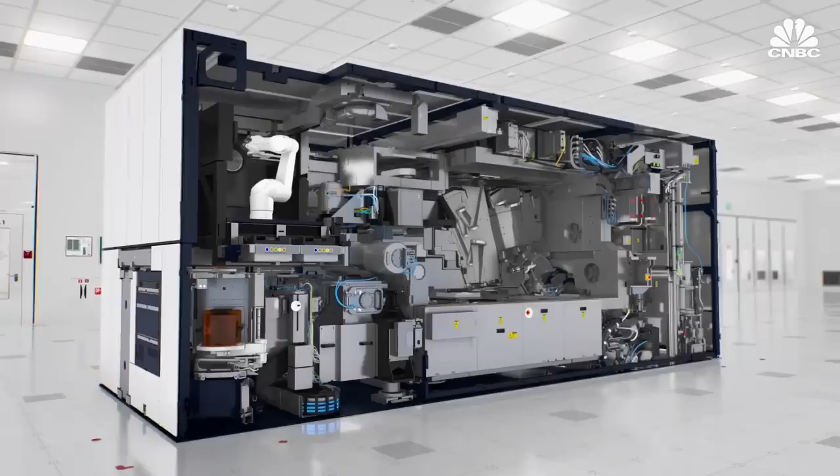ASML has a monopoly on the fabrication of EUV lithography machines, the most advanced type of lithography equipment needed to make every single advanced processor chip that we use today. This company is one of the most extraordinary organizations in the world. We are the only provider on the planet of this critical technology, the most advanced technology manufactured in the United States. This vision started 50 years ago with bringing the digital world onto a chip, and that pace of technology innovation is unstoppable.

At the center of this big factory in the Netherlands, in the midst of a months-long assembly process, there's a revolutionary machine that the whole world has come to rely on. You could see an EUV machine right behind me. The size of a city bus, but working with atomic-level precision, these EUV lithography machines are the most expensive step in making every advanced microchip that powers the modern digital age.

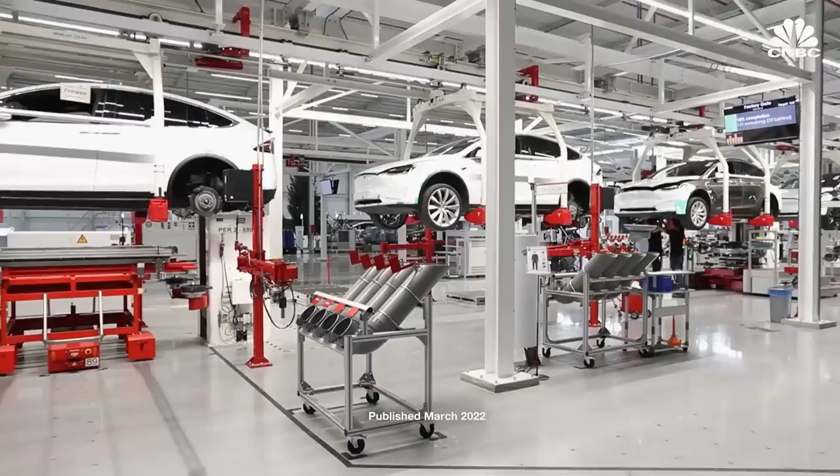Data centers, cars, and every single iPhone rely on this. We are the only provider on the planet of this critical technology. These machines are the only way to print minuscule designs on these chips. They cost up to $200 million, and they're only made by a single company, Advanced Semiconductor Materials Lithography, or ASML.

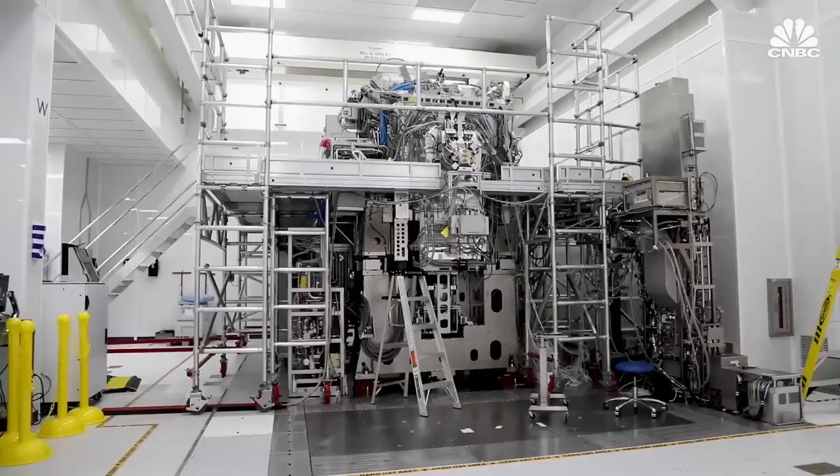Today, ASML has a monopoly on the fabrication of EUV lithography machines, the most advanced type of lithography equipment that's needed to make every single advanced processor chip that we use today. This company is one of the most extraordinary organizations in the world. The machines that they produce, each one of them is among the most complicated devices ever made.

In the midst of a chip shortage that's caused back orders of everything from PS5s to Teslas, the need for ASML has never been higher. Its stock has skyrocketed since 2018, while its three main customers, chip makers TSMC, Intel, and Samsung, vie to be front of line for ASML's next breakthrough technology.

The price tag for this next machine, which promises to push the boundaries of known physics, is more than $300 million. It's so expensive that most companies cannot afford it. While the chip wars rage on, we wanted to find out what's really going on inside the quiet company making the machines that print them all.

This is the optical part of the machine that makes EUV possible. We got a rare tour inside ASML's clean rooms in California and the Netherlands to see how these machines use precision lasers, exploding molten tin, and the smoothest surface in the world to bring our digital age to life.

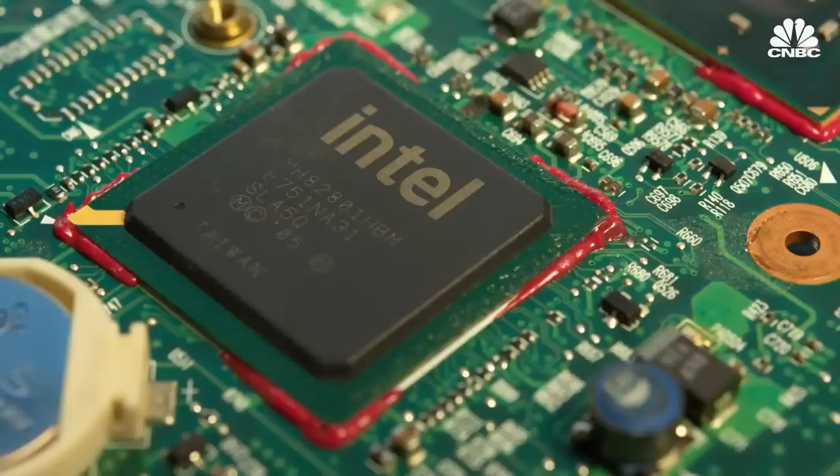ASML's crucial role on the chip-making stage has brought it wild success over the past few years, making it even more valuable today than Intel, one of the biggest chip makers it supplies. It's double-digit growth every year, and we're not a startup. We have now 32,000 people.

Peter Wennink has been CEO since 2013, but he joined ASML back in 1999, just 15 years after its humble beginnings. It started as a subsidiary of Dutch electronics giant Philips in 1984, conducting research out of a leaky shed next to a Philips office building in Eindhoven in the Netherlands.

They were in financial dire straits, so we had no money. We were poor. And because the problems Philips had were so big, nobody looked at this little outfit out there that was trying to do something crazy, so they neglected us.

Still, in its first year, the company successfully launched a first-of-its-kind machine that used precise rays of light to print tiny designs on silicon to make microchips, a technology known as lithography. The first lithography tool really looked like a projector. There is basically a reticle which holds the image that you want to project, then there is an optical system which is going to take this image and project it on the wafer.

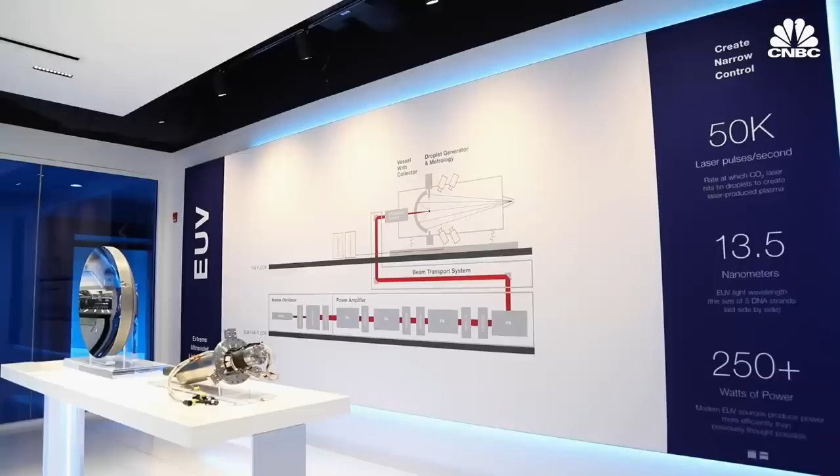Semiconductor lithography was invented in a US military lab, and for a long time, up through the 1980s, the key lithography firms were American, based in New England. Chris Miller of Tufts University is writing a book called The Chip War, about the fight for the world's most critical technology. When the industry was getting ready to jump into the early stages of EUV research, none of the US firms were ready to take the plunge on what would be an expensive and risky proposition, whereas ASML was.

By 1988, ASML had 5 US offices with 84 employees, and a new Dutch office that eventually became its headquarters in Veldhoven, where CNBC took a tour earlier this month.

We're walking through the EUV factory, which is about 50,000 square meters of space with 1,500 employees working in shifts 7 by 24 to produce 100% of the EUV machines shipped worldwide from this facility.

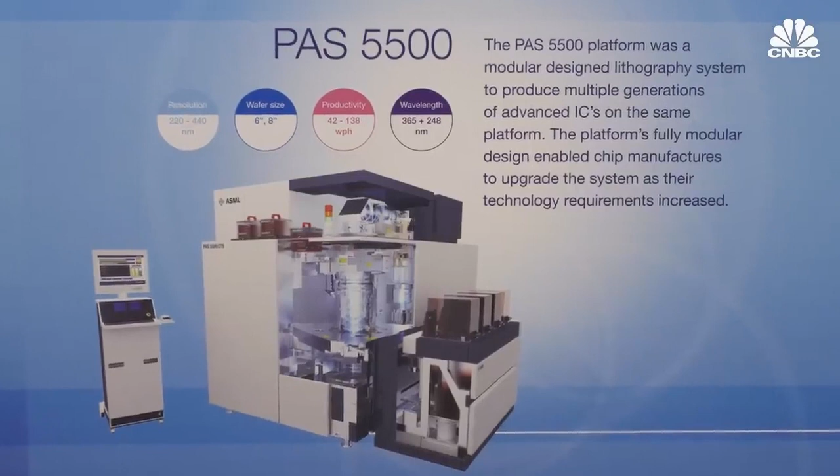With a breakthrough machine, ASML started turning a profit and went public on the Amsterdam and New York Stock Exchange in 1995. By the 2000s, ASML was acquiring California tech companies like Silicon Valley Group and various key suppliers like Cymer in San Diego, where we also got an inside look at the cleanroom where ASML's light source is produced.

So this is actually the nozzle manufacturing area where we build the nozzles. This is the piece where the tin shoots out of. That's what's going to create your EUV.

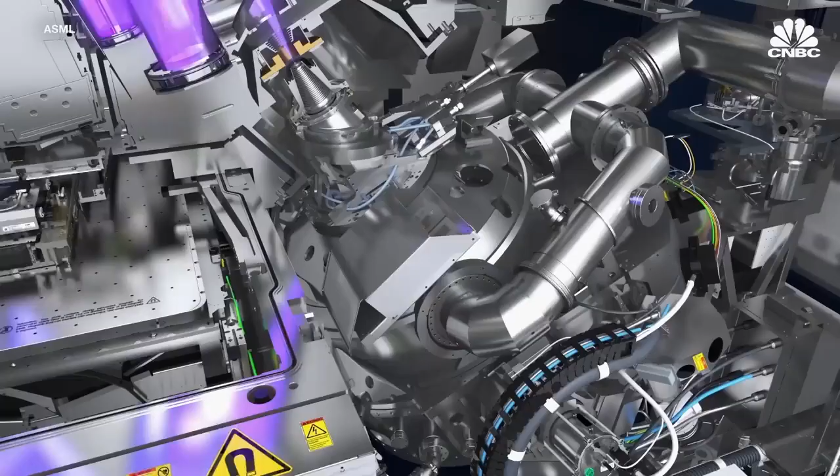EUV refers to extreme ultraviolet, an incredibly short wavelength of light that ASML uses to print smaller, more complex chips. But developing this revolutionary technology was incredibly expensive.

We didn't have the money, so we went out and found partners, which was the basis of the way that we built the company. So we were forced to be a system architect and a system integrator.

In 2012, ASML offered about a quarter of its shares to its biggest three customers: Intel, Samsung, and Taiwan Semiconductor Manufacturing Co., or TSMC. They had to accelerate the R&D for EUV, and the only way they could do this is to get their largest customers involved. And one way you can make your commitment real is to make them a shareholder.

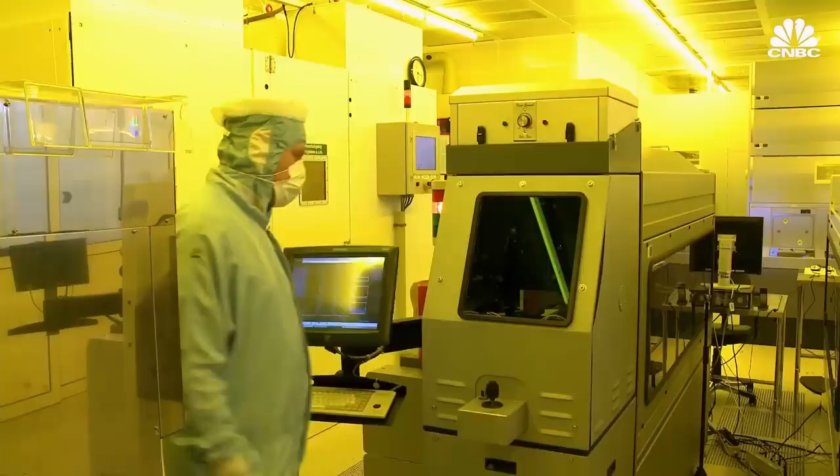ASML is a Dutch company, but it's also a Dutch company that relies very heavily on US components, in particular for its machines, and at this point relies also very heavily on one Taiwanese customer for its sales.

TSMC made up nearly 40% of ASML's sales last year. In 2019, the Taiwanese chipmaker was the first to deliver high-volume chips made with EUV, a milestone that's kept it at the head of the pack ever since, its chip technology at least one node ahead of Samsung and Intel.

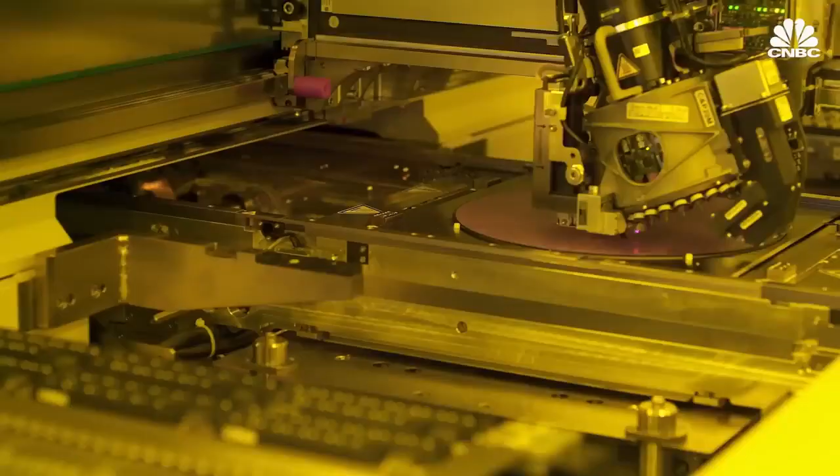And it has been TSMC's customers that have gained a lot of benefit, like AMD, NVIDIA, and others. And yeah, you can argue that this has come at the expense of Intel not executing. Intel is just now producing its first chips with EUV this year, 3 years behind TSMC.

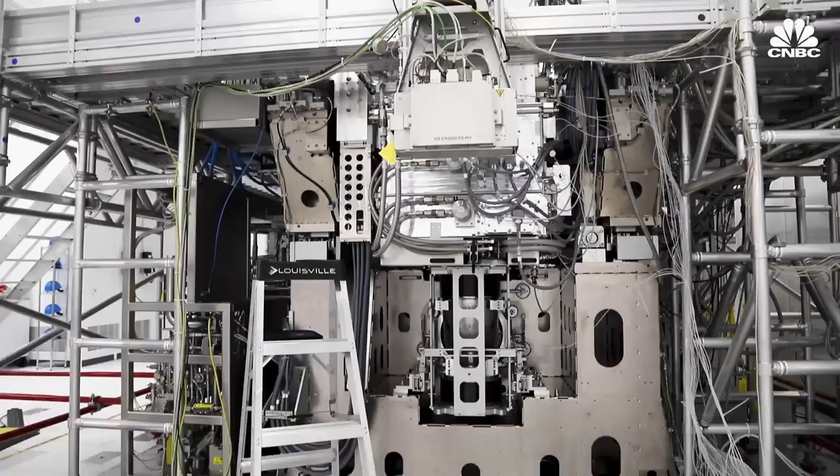But it's made a bold move in hopes of catching up, an early investment to secure the first prototype of ASML's next machine, high numerical aperture.

To understand why the success of a giant like Intel hinges on ASML, let's take a look at how EUV lithography revolutionized chipmaking. When you start breaking down what it takes to make an EUV lithography machine, it's sort of Nobel Prize winning in terms of the engineering involved.

Chips are made from silicon, an abundant element found in rocks and sand that's purified, melted down, then sliced into circular wafers, the surface on which chips are built in a grid formation. Each wafer can have dozens of thin layers, making up billions of transistors that determine what the chips can do.

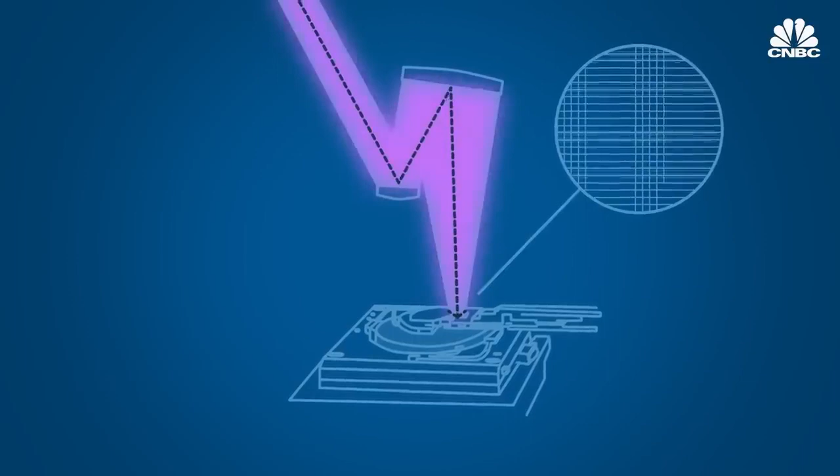These layers are printed using lithography. Extremely precise rays of light are projected through a mask of the chip design. When the light hits the surface of the wafers, which have been coated with photoresist chemicals, it prints the minuscule designs on each layer at extremely high volumes.

If you think of a typical processor chip in an iPhone, for example, it will have over 10 billion transistors on a chip, and Apple will sell 100 million or more iPhones for each model that's rolled out. So you're already talking in numbers that are far bigger than you or I remember how to pronounce.

As the wavelength of the light source in making chips gets narrower and narrower, it gives us the ability to make chips with smaller features, which means the chip is faster, the chip can be smaller, the power consumption of the chip can be lower. The smallest transistors are more than 10,000 times thinner than a human hair.

The designs have gotten so small, ASML had to develop new methods of printing at the very edge of known physics. With the help of customer investments and a consortium of scientists, ASML figured out a way to create large amounts of extreme ultraviolet light, with a wavelength so short it's not only invisible to the human eye, it's absorbed by all natural substances, even air.

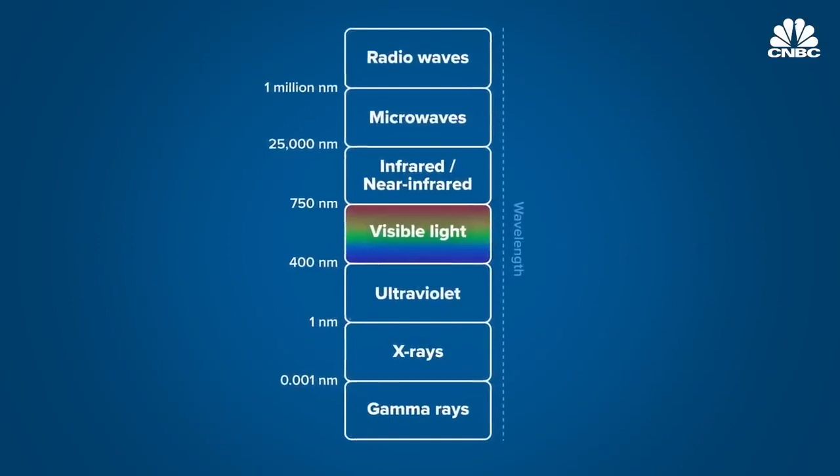So the entire process has to happen in a vacuum, a first for lithography. At 13.5 nanometers, ASML's EUV wavelength is the size of just 5 DNA strands laid side by side.

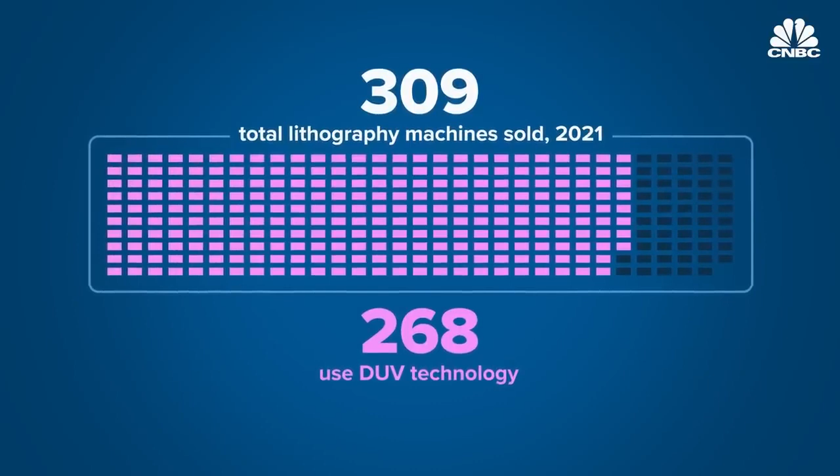The previous generation machines used deep ultraviolet light, or DUV, with a wavelength of 193 nanometers. The vast majority of ASML's business, 268 of the 309 machines sold in 2021, still use DUV technology, which is used to print the less advanced chips, which are in shortest supply.

DUV is for anything that is low technology, like a toaster or a refrigerator, or even some of the electronics in your car. Today's iPhone 13 is EUV.

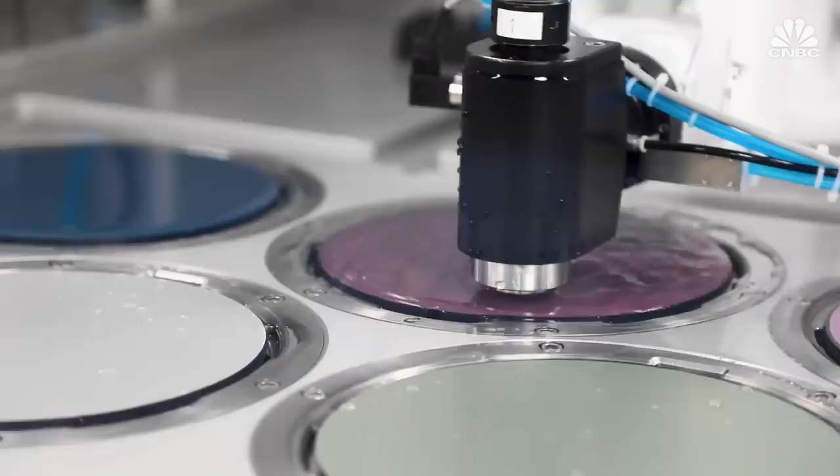Both DUV and EUV lithography is so advanced it requires precision down to the atom. This is an EUV cabin of our clean room, which is 10,000 times cleaner than the outside air. We're wearing these clothing not to protect ourselves from the environment, but to protect the machine from the contamination that's created by us.

This tiny thread may look like the strand of a spider web, but it's actually molten tin being shot out at a pressure of 4,000 psi, and it's how the EUV light is created. This is continuous tin—it never, ever stops. The tin is streaming through a perfectly calibrated nozzle, which we saw being built in San Diego, at a rate of 50,000 droplets per second.

A 30 kilowatt carbon dioxide laser hits each droplet twice, vaporizing them into plasma. These tiny explosions are what emit photons of EUV light. A huge number of tin explosions need to happen because only about 5% of the photons reach the actual wafer.

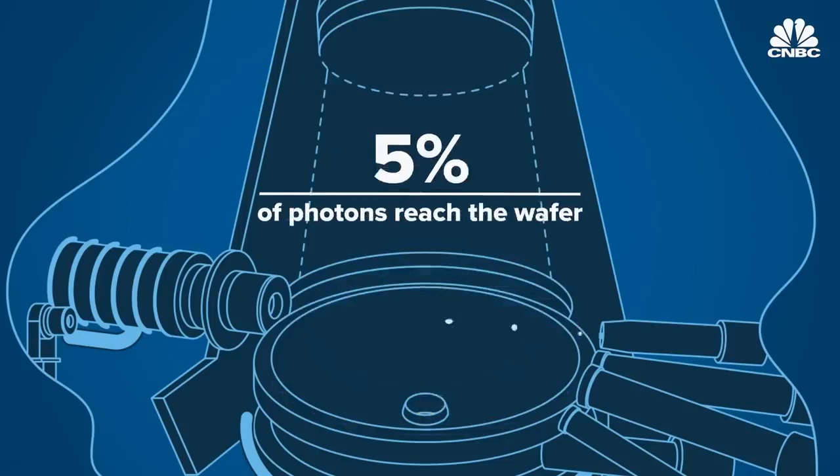The light particles are so short they get absorbed by glass, the typical method used to precisely aim light through a lens. So ASML partnered with German optics company Zeiss, which makes the flattest surface in the world. The flatness is really just incredible. If you took a mirror element that is maybe this big and blew it up to the size of the country that we're in, the biggest bump would only be about 1 millimeter across the entire surface of a mirror the size of this country.

EUV light bounces off these groundbreaking Zeiss mirrors until it hits photoresist chemicals on the surface of the silicon wafer to print minuscule designs that make up the chips. The aim needs to be so precise, TSMC says it's equivalent to shining a laser from the moon to hit a coin on the Earth.

So your tin is inside a reservoir here, and then you're firing out this way. Pete Mayall has been running this clean room for 6 years. If any kind of defect particle whatsoever is even on the tip of that capillary, it's a fail—we'll remove it and start all over again. And the speed and scale at which this has to happen is staggering.

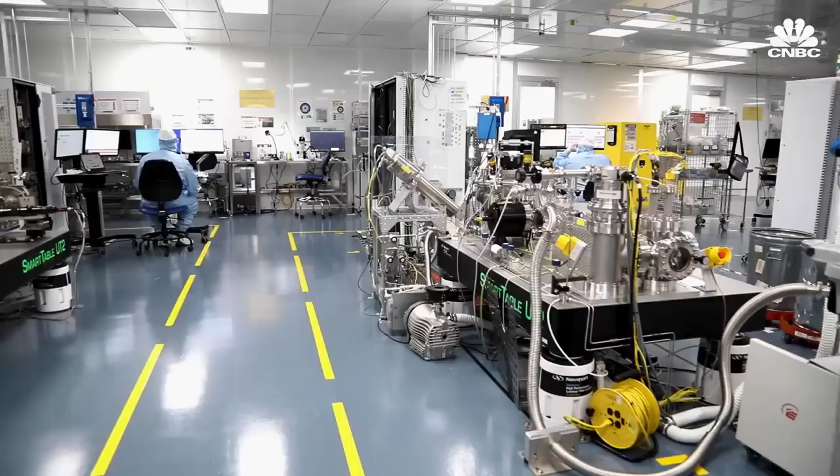ASML says an EUV machine churns out about 3,000 wafers a day. There can be hundreds of chips on a 300mm wafer, and up to 10 billion transistors per chip. They take extraordinary achievements of engineering and physics, and they're able to replicate these on a mass production scale and at a low enough cost where these machines can be used in chip fabs to churn out thousands and millions of chips for the companies that buy them.

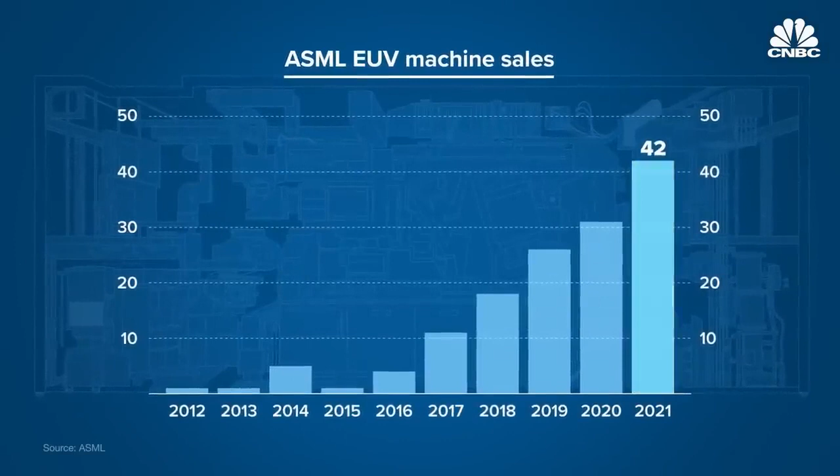A completed EUV machine is actually made up of 7 different modules, each built at one of ASML's 6 manufacturing sites among its 60 total locations around the world, then shipped to and reassembled in Veldhoven for testing. Then it's disassembled again for shipment, which takes 20 trucks and 3 fully loaded 747s. In 2021, ASML sold 42 EUV machines, bringing the grand total it's ever shipped to just about 140.

With each machine costing up to $200 million, only 5 customers can afford to buy EUV systems: Micron, SK Hynix, Samsung, Intel, and TSMC, the last 3 making up nearly 84% of ASML's business. It certainly has eliminated a lot of players out of that market. We saw GlobalFoundries, back 5 years ago or more, say that they weren't going to pursue a 7-nanometer chip. The handful of huge customers it does have are furiously adding capacity to try to ease the global chip shortage, which is impacting ASML too.

We got a lot of messages from our suppliers that said, hey, we might be late in delivering our modules to you guys because we cannot get the chips. And we said, well, if we cannot get the chips, we cannot make the machines to make more chips. So there's a catch-22, huh? We're still managing, keep our fingers crossed, but it's a daily struggle.

The question is, can ASML keep up with demand? I think the answer is probably yes.

Maybe the growth will exceed even their targets, but they're certainly preparing to ramp up production, which is good news if you're worried about a chip shortage. The world needs more chips, so we need to make more machines, which will keep growing in average selling price as long as we can drive the cost per transistor down, which is exactly what we've been doing for the last 38 years, and we will keep doing for the next couple of decades.

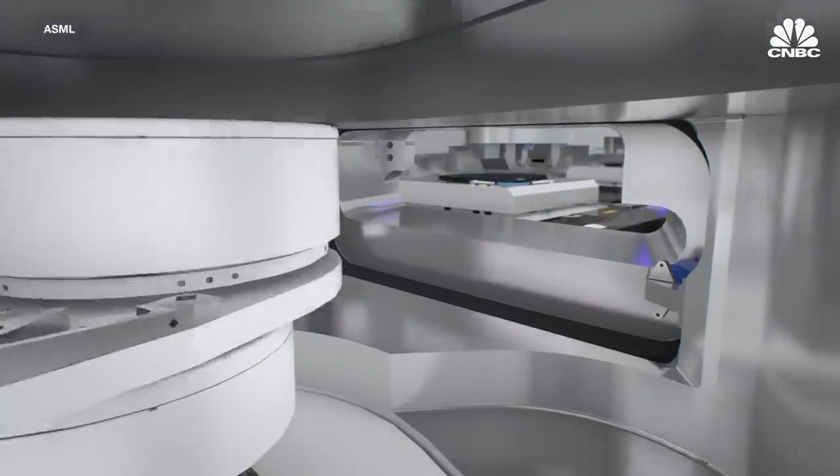Before EUV, chipmakers had three companies they could choose from for their photolithography tools: ASML, Nikon, and Canon. Nikon in Japan is still a competitor for DUV, but ASML is the only option for EUV. Experts say it could take decades for any other company to catch up, not only because of ASML's proprietary tech, but because it's built complex, often exclusive deals with nearly 800 suppliers.

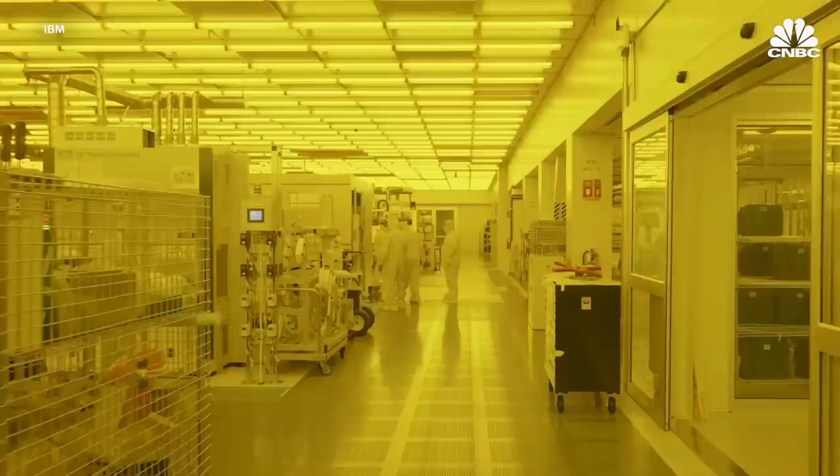We're unique to our customers, like some of our suppliers are unique to us, and those almost symbiotic relationships, some people say, are worse than being married because you cannot divorce. It takes 10 years to not only get the technology, but then be accepted. So the buyers for semiconductor manufacturing fabs are very risk averse.

One of the ways ASML has insulated itself against supply chain risks is by purchasing some of its suppliers, like Berliner Glas in 2020. A fire broke out there in January, but Wennink says it won't significantly impact system output in 2022. Instead, ASML projects 20% sales growth this year and an annual revenue growth rate of 11% until the end of the decade.

It's actually driven by you. You're asking for more solutions that will help you have a better life, to make your life easier, your life more productive. We're changing into a sensing world. There are sensors everywhere — in your car, in your fridge, in your PC, they're everywhere, sensors. They need semiconductors.

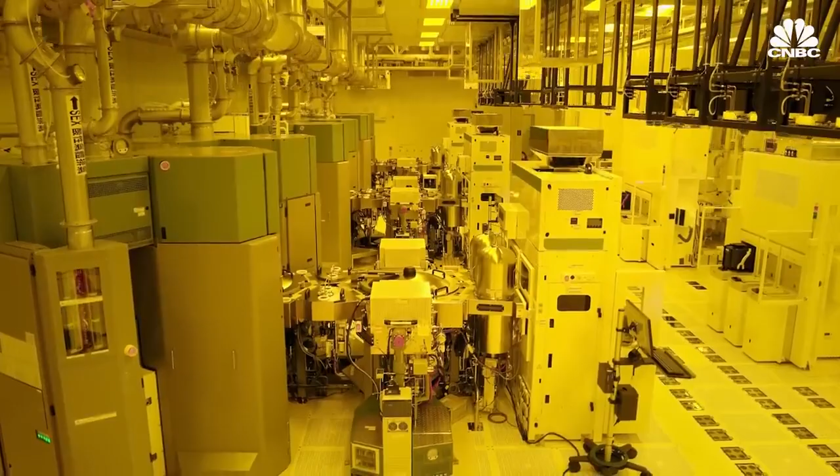All of the world's most advanced semiconductors are made in Asia by two of ASML's biggest customers, TSMC and Samsung. But the chip shortage has raised concerns about overseas dependency. This is why you see all these initiatives around the globe: the US Chips Act, the EU Chips Act, the Korean Chips Act, the Japanese Chips Act, the Chinese Chips Act. It's now a very strategic commodity.

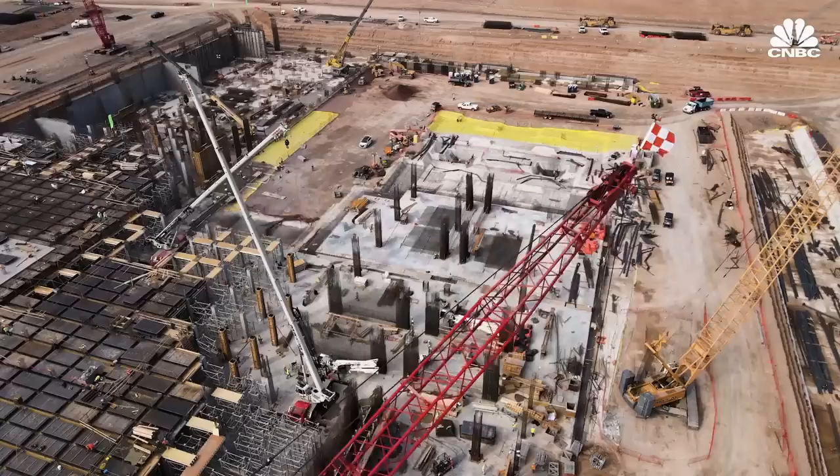Intel just announced a $20 billion chip fab in Ohio, and it's also building one in Arizona, just down the road from a massive new fab where TSMC will make advanced chips in the US for the first time, and Samsung is building a $17 billion fab in Texas. All this came after President Joe Biden proposed the CHIPS Act, with $52 billion in subsidies for chip companies to manufacture on US soil.

It means that we need to ship our machines sooner, earlier, and at higher volume. So it means we need to hire more people in the US. It's talent, it's people — I think that's where the biggest challenge will be.

But this movement toward domestic production has another side that poses a challenge for ASML: a desire to stop sharing chip-making technology with China. China has wanted to get into that race, but there's been politically generated reasons why China has not had access to the same type of technology as other companies.

As far back as 2018, the Trump administration reportedly pressed ASML not to sell EUV systems to China. ASML still hasn't sold a single EUV machine to China. 42 countries around the globe have agreed to put export control measures on it because it's so critical. So it's not our choice, it's the choice of governments.

ASML also refurbishes older lithography systems and sends many of those to China, more recent DUV machines all the way back to its early systems from the 90s. 96% of all the machines we ever sold, we ever shipped, are still working.

There's a lot of debate about whether selling additional DUV equipment to China is also a national security risk, by letting China increase its ability to manufacture close to cutting-edge semiconductors. And so I think there's some chance that in the coming years there are new restrictions imposed on ASML's ability to sell DUV equipment to China as well. If export controls were expanded to include DUV machines, it could greatly impact ASML's bottom line.

Chips are in everything, and they've been in short supply since just a few months into the pandemic last year. That's why it's been hard to buy everything from cars to PS5s. Turns out one company makes 24% of all the world's chips and more than 90% of the most advanced ones, the smallest, fastest chips used in today's iPhones, supercomputers, and automotive AI. Heck, we even have product that's landed on the last Mars launch that are taking pictures of Mars.

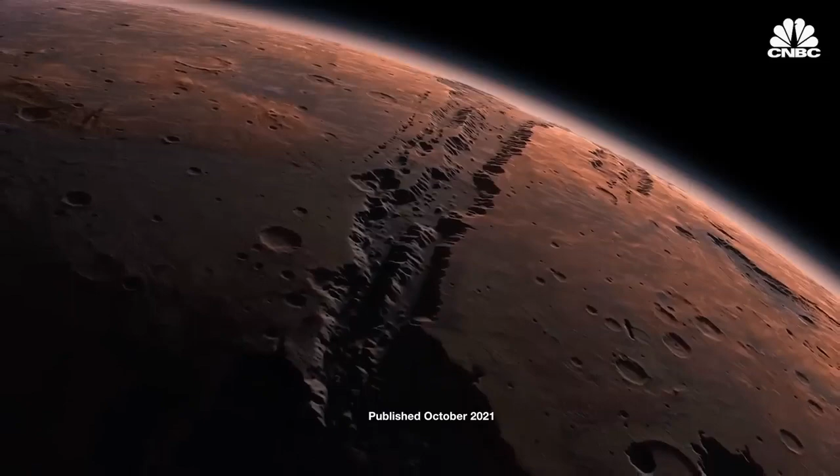Taiwan Semiconductor Manufacturing Company, or TSMC, is not a household name, but it's quietly making chips for every new iPhone, US fighter jets, the highest-end processors, you name it. And now it's investing $100 billion over 3 years to ramp up production amid the shortage. The combined output of what we're doing is in excess of 12 million wafers a year.

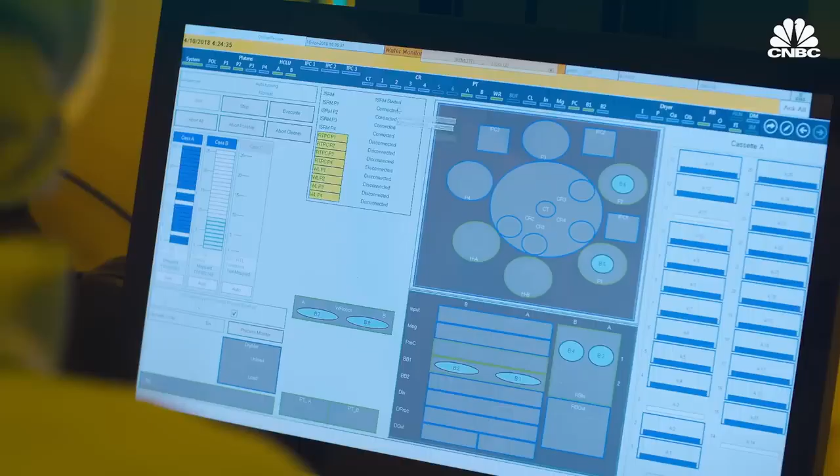But the world's massive reliance on TSMC may also leave the global chip supply vulnerable to earthquakes, drought, and geopolitical tensions with China. It's become almost a monopoly at the leading edge, and all of those manufacturing operations, for the most part, are out of Taiwan, Hsinchu. That becomes a matter of national importance for the United States, but not only the United States, but the Western world.

TSMC almost always keeps its production sites closed to US video crews, until now. The total floor space for this fab is around 2.3 million square foot.

The US was the birthplace of advanced silicon, but for decades now, it's been losing market share to Asia, where 75% of chip production happens now. TSMC is now bringing the world's most advanced chip making back to the US, with a $12 billion fabrication plant, or fab, in the middle of the Arizona desert.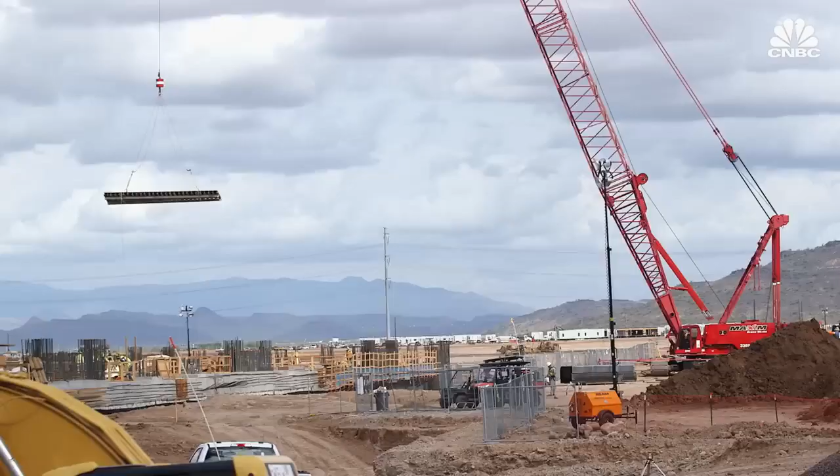It's going to be, when it gets introduced to production in 2024, the most advanced technology manufactured in the United States. We got an exclusive tour of the fab site in northern Phoenix to get the truth about the secretive Taiwanese company and why the world's largest contract chip maker is bringing bleeding-edge chip manufacturing back to US soil.

When Morris Chang first proposed the idea for TSMC in the mid-'80s, investors were skeptical. Born in China and educated at Harvard, MIT, and Stanford, Chang moved to Taiwan after 25 years at Texas Instruments. There, the government asked him to create a Taiwanese semiconductor company that would become a world leader. His idea? Focus only on manufacturing, what's known now as a pure-play foundry.

When you're just focused on one thing, you do one thing really well. Rick Cassidy is TSMC's top executive in the US. He's been with the company for 23 years. The slice we spun out was foundry, and that's what we do. And we put all of our resources into doing that one thing.

Chang bet big on a need that didn't exist in the 80s. When he founded TSMC in 1987, giants like Intel and Texas Instruments took pride in designing and making their own chips. A legendary saying in the industry back then was, 'Real men have fabs.' When Morris went out to get funding, he went to many named companies, and they told him, 'Morris, your idea won't get off the ground. If you get it off the ground, it can't scale.'

But as chips got more complex, making them became an enormous undertaking. Building a fab today takes at least 2 years and $10 billion. It's become nearly impossible for even the biggest chip companies, Intel, Nvidia, Broadcom, Qualcomm, AMD, to do it all and keep up with the most advanced tech.

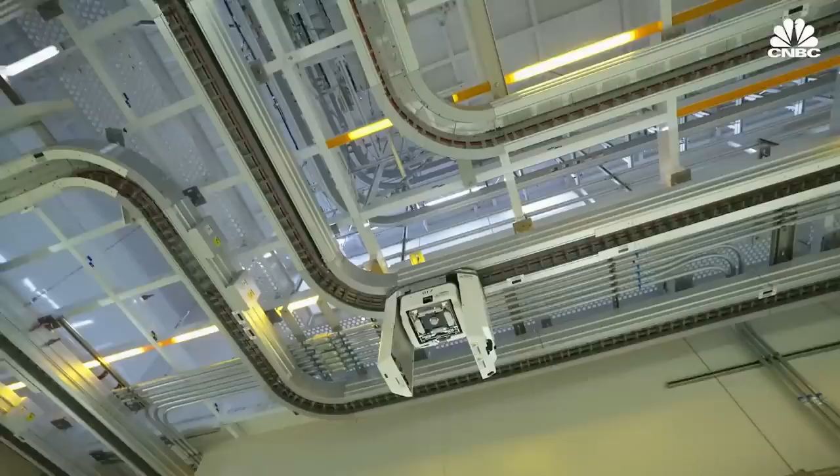Intel, for example, still designs and makes its own chips, but it's fallen behind Samsung and TSMC in recent years, even relying on TSMC to make some of its chips. So if you were a smart designer, you didn't have to have billions of dollars in a fab behind you, for the first time, with the emergence of TSMC.

Now, each major step of chip making is often handled by a separate company. Some, like ARM and MIPS, focus on IP and architecture, providing the core building blocks to design chips. Then there's electronic design automation, EDA companies like Cadence and Synopsys that write the software used to design chips. Only one company, ASML, makes the $180 million extreme ultraviolet light machines required to etch designs into the most advanced chips. And then, of course, there are the wildly successful fabless companies designing the chips. Think Apple, Qualcomm, Nvidia, and many more.

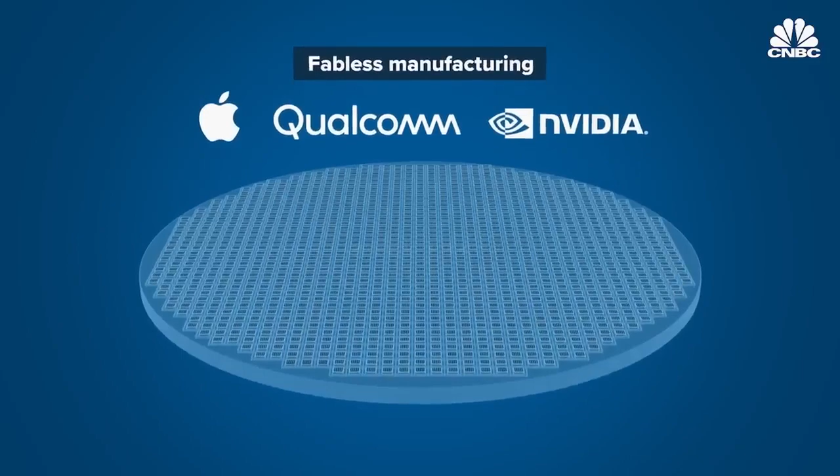As these fabless companies took off, TSMC found itself on a flywheel, making more and more of the world's chips. This has allowed TSMC to not only catch up, but in my opinion, surpass Intel to become the world's greatest manufacturing technology on the planet, and responsible for becoming one of the top 10 most valuable companies in terms of market cap in the globe.

TSMC was first listed on the Taiwan Stock Exchange in 1994. In 1997, it became the first Taiwan company listed on the New York Stock Exchange. By the 2000s, it had caught up with the 20 or so other companies making the most advanced chips at the time. As the tech kept advancing, more and more fell behind, until today only 2 manufacturers remain that can make the most advanced 5nm chips: TSMC and Samsung.

In 2014, Apple started relying on TSMC to make its A-series chips for the iPhone as it moved away from reliance on Samsung, a direct competitor in mobile phones. Today, there's a TSMC chip inside every iPhone on the market, and Apple has moved away from Intel too, now relying on TSMC to make the chips inside most Macs.

But they remain sort of in the background. So Apple gets all the accolades when a new phone comes out. We let our products speak for themselves. Their success brings all the business that we could ever hope for.

As to why TSMC hasn't allowed US media into its sites before now - is part of the secrecy have to do with IP? Sure, because the IP protection is very important for in this industry. Not only the TSMC, but also for the other companies in the industry.

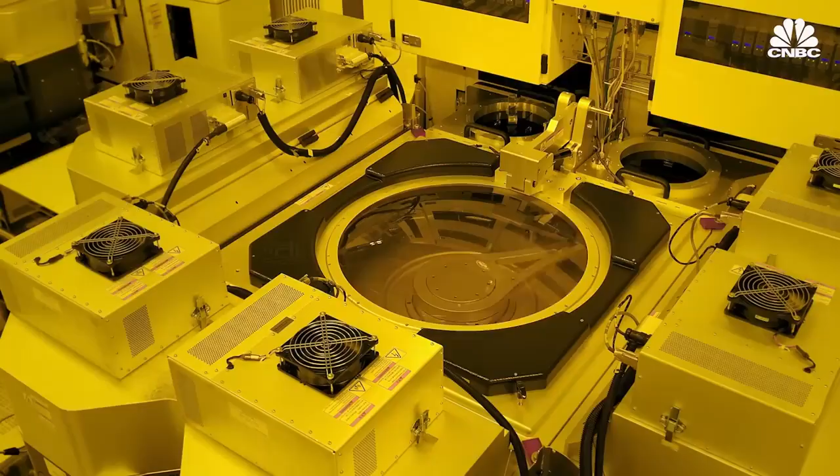In 2018, at age 86, Chang retired as chairman of TSMC. His radical, pure-play foundry idea continues to pay off. With the opening of a new fab in Taiwan next year, TSMC is in a race with Samsung to make the world's first 3nm chips, with Intel planning to get there by 2025.

Along with cutting-edge 3 and 5nm, TSMC also makes far larger chips for everything from cars to coffee makers. To understand the different kinds of chips and why nanometers matter, let's look at how they're made.

Silicon, an abundant element found in rocks and sand, is purified and melted down, then sliced into circular wafers. These wafers are the surface on which chips are built in a grid formation. Each chip on the wafer can have hundreds of tiny layers, each made up of transistors and electrical circuits, which determine what the chip can do.

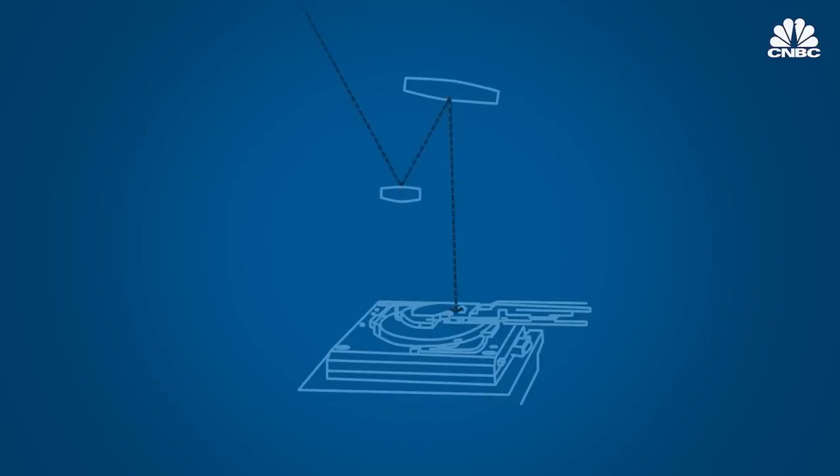The minuscule circuitry is printed on each layer using lithography, extremely precise rays of light. The smaller the width of the transistor gate, 5nm, 3nm, the more processing power can fit in a given space, with less power needed. The smallest transistors are more than 10,000 times thinner than a human hair.

Most of the chips are probably about the size, a large one, of my thumbnail. On there you might have something like 50 billion plus transistors, and they all have to work. These are parts that are going to be used in lots of different places: CPUs, GPUs, IPUs, etc.

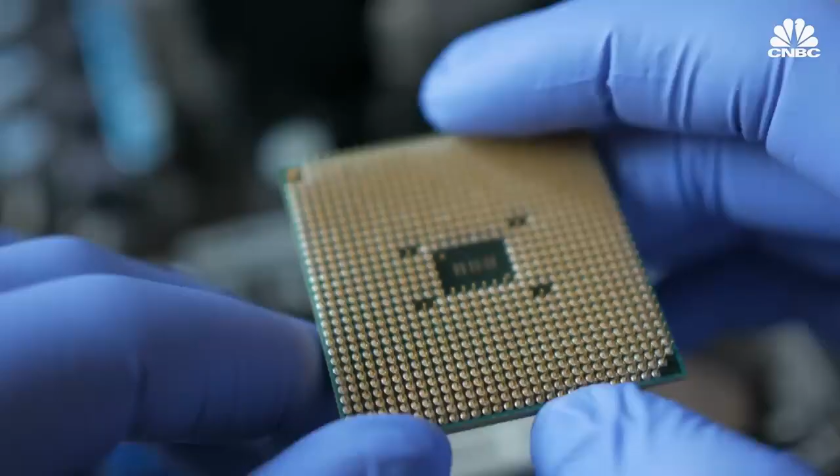They'll be used in smartphones. Bigger chips are used in most household devices, things like a TV remote or electric toothbrush. Cars often use less advanced 28 to 40nm chips.

And all types of chips have been impacted by the shortage. Car makers like GM and Toyota have paused production at some plants. And Apple is cutting its 2021 production targets for the iPhone 13, with orders for the 13 Pro Max delayed by more than a month.

Right now, no fab in the US can make 5nm chips, but TSMC is changing that. From the F-35 strike fighter to these consumer products, their customer base is wide.

500 plus companies are their customers in the United States. And so as a byproduct of that, we knew they were going to need to be in the United States at some point. Chris Camacho of the Greater Phoenix Economic Council got to visit TSMC's fabs in Taiwan during the 5 years he was helping negotiate the deal that brought the project to Arizona.

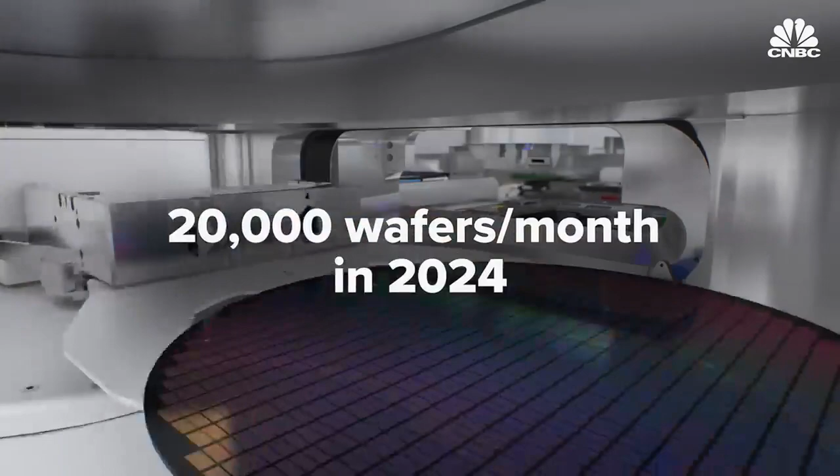The robotics, the automation, the mechanization occurring before your eyes. And so you can see how these things not only are so capital intensive, but their output is so significant. TSMC is 6 months into building this massive 5nm fab outside Phoenix that will pump out 20,000 wafers per month starting in 2024. The chips from the wafers will end up in iPhones, high-end processors, and much more. Arizona project leader Tony Chen has led 17 other fab construction projects in his 23 years with TSMC.

Actually, this project is designed for 5nm fab. That's a copy from the fab we have in Taiwan.

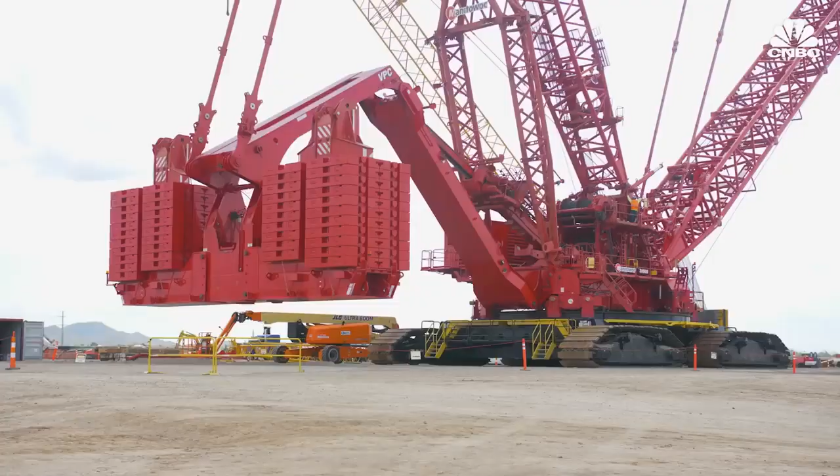Just down the road, Intel is in the midst of building 2 new fabs, spending $20 billion. These massive buildings, used to make minuscule chips, have brought some of the world's largest equipment to Arizona. This is the biggest crane that Manitowoc makes. There's only 2 of them in existence, and it's a 2,300 ton crane.

Since we've started, our dirt contractor has moved over 3,731,000 cubic yards of dirt. We've also used over 260 million gallons of water. Indeed, building a fab and making chips takes an incredible amount of water.

Something that's not easy to find in the middle of the desert. Arizona's biggest water source is groundwater, but deep wells at big farms are using up groundwater faster than it's naturally replenished. We do need around 4.7 million gallons per day of water to support the production.

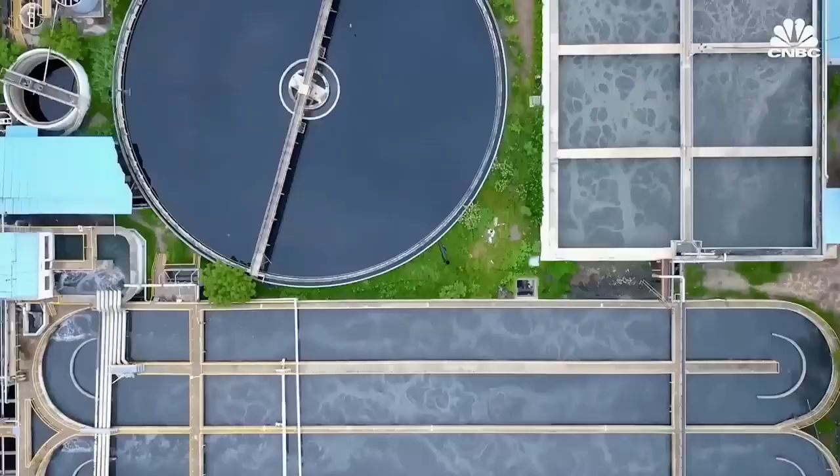TSMC is no stranger to water shortages. Taiwan is facing its worst drought in 56 years, something that TSMC says has not impacted production.

In Arizona, TSMC says an on-site water treatment center will recycle up to 90% of water used at the fab. And then ultimately that water will be re-injected into the aquifer in partnership with the City of Phoenix after reverse osmosis and other technology solutions are provided.

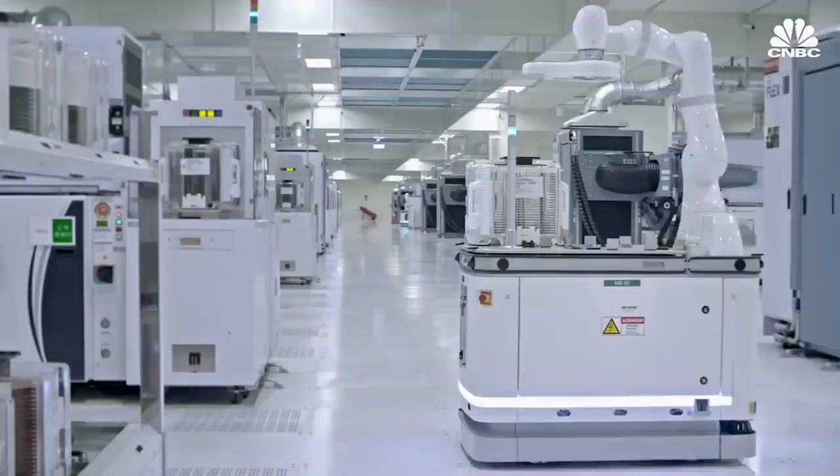Another challenge of producing the most advanced chips stateside, the current specialists are all in Asia. TSMC's best engineers right now are in Taiwan. They're likely going to stay in Taiwan. The most cutting-edge R&D is going to be done in Taiwan.

To solve this, recruiter Roxana Vega says TSMC is bringing over some of its top experts from Taiwan. They're seen as subject matter experts in what they do in our fabs over there. And so it'll be a temporary assignment, depending 2, maybe 3 years.

TSMC has already sent some 300 new U.S. hires to Taiwan for 12 to 18 months to get up to speed. Their opportunity to train in our 5nm gigafab in Taiwan gives them that insight of how immense and how state-of-the-art our tools, machinery, and everything is going to be here in Arizona.

Taiwan is not very good when it comes to analog semiconductor design. And by moving to the United States, you'd be able to tap into a much larger number of analog designers. This diversification is a key reason for TSMC to bring advanced manufacturing to the U.S.

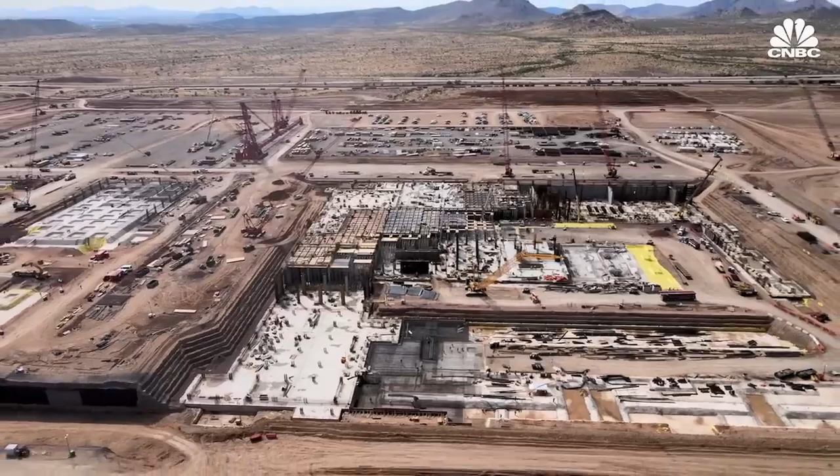And then there's proximity to its huge, fabless customers based in the U.S., like Apple, NVIDIA, and Qualcomm. If you want more capacity, you have to build more fabs. And that's one of the reasons that we're moving to the U.S. Our customers want us in the U.S. The U.S. government wants us here. Over 60% of their customer base is still U.S. companies.

So some of these companies, like Apple, had hinted that they want their supplier to be closer to home, just in case. TSMC has 12 fabs, almost all of them in Taiwan and China.

They account for nearly 54% of all global foundry revenue. And this heavy reliance on TSMC in Taiwan leaves the world vulnerable to potential slowdowns, from earthquakes, the current drought there, or the geopolitical tensions swirling around the US, China, and Taiwan.

But some refer to TSMC as Taiwan's silicon shield. The silicon shield is TSMC is extremely important, and I think people depend on us. The media paints a very bleak picture of this situation, but I'm actually much more optimistic, in part because of this idea, the semiconductor shield.

China, as of right now, needs them for their leading edge manufacturing. The US also depends heavily on the chips coming out of Taiwan, a key reason the government worked hard to convince TSMC to bring its tech here. We're not going to have to worry about geopolitical conflict. We're not going to have to worry about another major pandemic. We will have these kind of manufacturing capacities on U.S. soil.

Today, only 12% of the world's semiconductors are made in the U.S. That's down from 37% in 1990. Back in the days of Bell Labs and the early days of Silicon Valley, we were probably 100%.

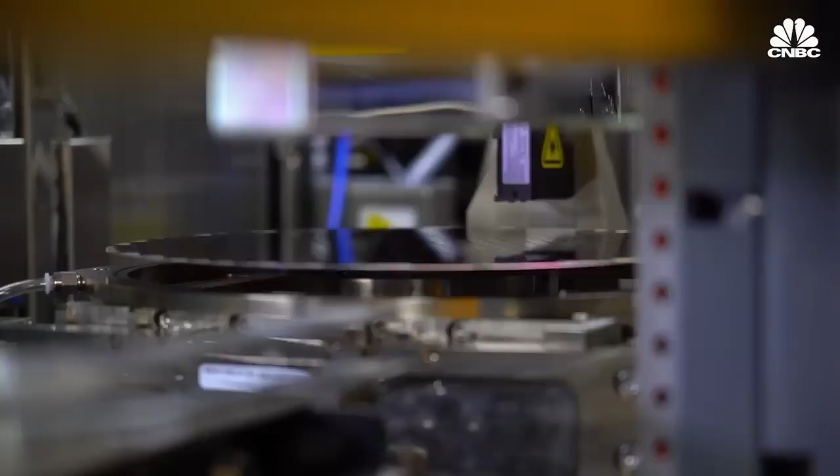Both state and federal officials are eager to entice TSMC to bring advanced silicon back to the country where it first took off. The state of Arizona has a number of programs, including the Qualified Facilities Tax Credit and the Quality Jobs Tax Credit, that's really an incentive to help lower the cost of operations. In addition to that, the City of Phoenix put together a $200 million infrastructure package that helps TSMC access water and additional infrastructure needed. The Biden administration has proposed $52 billion in subsidies for chip companies like TSMC to manufacture on U.S. soil. It's been nicknamed the CHIPS Act.

This is infrastructure. So look, we need to build the infrastructure of today, not repair the one of yesterday. And things like the CHIPS Act are absolutely critical for the success of our country, not only to compete, but to recruit these kind of firms to operate in the U.S. Otherwise, we're going to be importing chips for the rest of our lifetime.

Over the last 20, 30, 40 years, we've slowly slipped in that manufacturing element, especially as we have seen the decreasing cost in other countries. It's somewhere between 20 to 25% cheaper for American firms to produce their semiconductors outside of the United States.

TSMC's Rick Cassidy took part in discussions that led to the CHIPS Act. We don't want anything more than to create a level playing field so that it doesn't cost more to make chips in the US than it does in other locations.

Industry reports estimate a $50 billion investment from the U.S. government would enable the construction of 19 new fabs in the U.S. over the next 10 years, more than doubling domestic chip manufacturing capability.

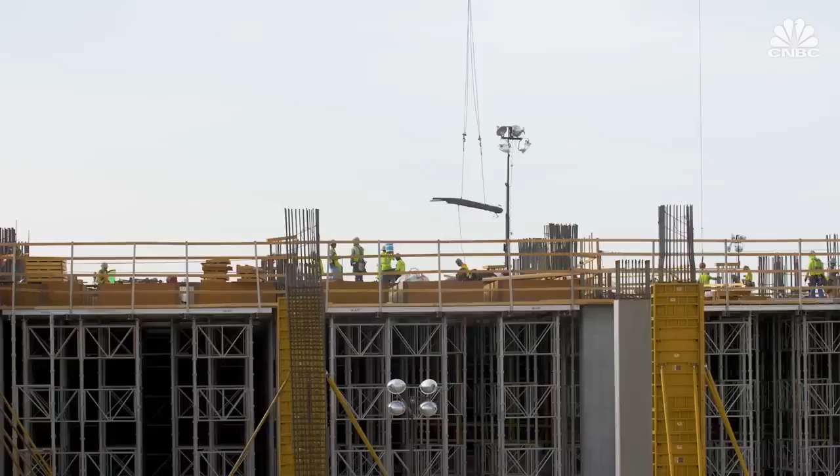Meanwhile, TSMC will certainly continue investing in ramping up production capacity, including in the U.S., where the 1,100-acre Arizona site certainly has room for a second phase and more. So we've got a lot of land, and we have the ability to do more there.

It will take time, but it's not just the chip and the foundries, it's going to be the entirety of the supply chain. So it's packaging companies, it's companies that produce the chemicals and the gases required that go into the manufacturing process. So I see this as an entirety of a shift in the semiconductor sector for the United States.

As you can see, we can get into a lot of trouble when everything is in one area alone. So I think it would be a great victory, in fact, to see the United States reverse the declines that we've had over the last few decades.

Intel was once synonymous with the world's most advanced chips. It's responsible for inventing the very building blocks of modern computing, from memory chips to microprocessors. Business models that have come about, internet being one of them, is all as a result of this vision that started 50 years ago with bringing the digital world onto a chip.

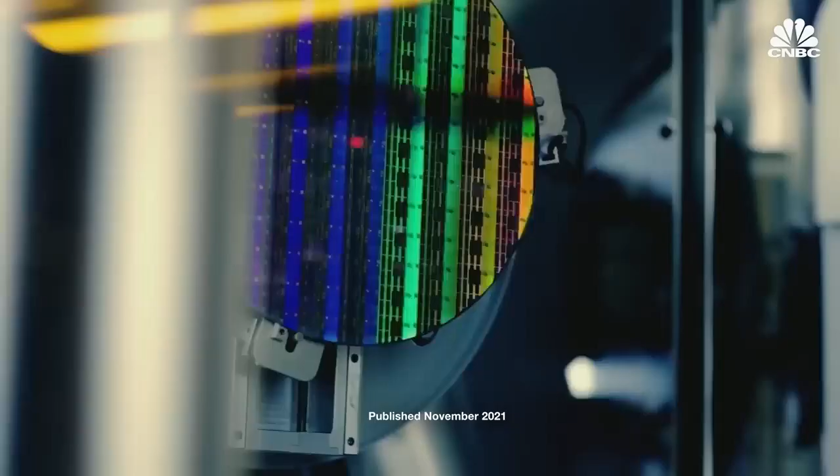And that pace of technology innovation is unstoppable. Chip technology is indeed advancing at roughly the same relentless pace predicted in 1965 by Intel co-founder Gordon Moore, doubling every 2 years. But Intel has failed to keep up.

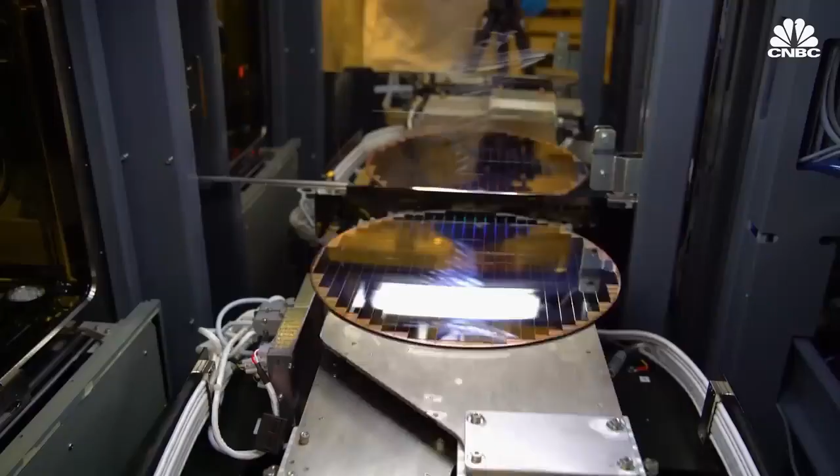The chips being made inside Intel's massive fabrication plants, or fabs, are no longer at the cutting edge. Intel was the Moore's Law company and the undisputed leader. Something that was supposed to take them 2 years instead took them more than 5, and they still struggle to get back on Moore's Law today. Now only 2 companies in Asia, Taiwan Semiconductor Manufacturing Company and Samsung, make all of the smallest, most advanced chips that power next-gen iPhones, supercomputers, and automotive AI.

The new Alder Lake CPUs, just released, are packed with competitive features, but its chip technology is behind the most advanced chips made by TSMC and Samsung. They got fat, dumb, and happy, and they took their eye off the ball. Once you fall off the treadmill, it's really, really difficult to get back on. It's a very dynamic and fast-moving industry.

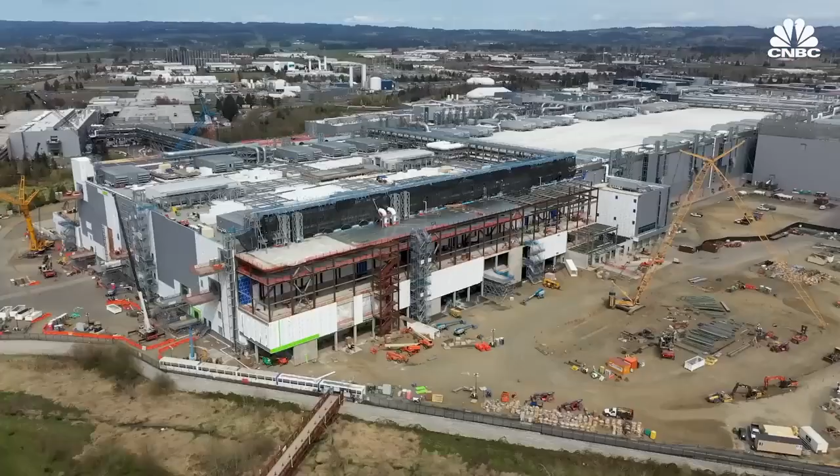But Intel's new CEO has a bold plan to catch up and help the global chip shortage. I think I have more concrete trucks working for me today than any other human on the planet. We have construction in Oregon, New Mexico, Arizona, Ireland, and Israel, and we expect to plant our next major fabs in the US and Europe before the end of this year.

CNBC got an exclusive tour of Intel's massive factory site outside Portland, Oregon, where it's building a huge new fab set to open early next year. So what's inside of here and what are we about to see? So what's inside of this truck here and what's just been offloaded onto our dock is one of our next generation tools. It's going to be installed in our D1X Mod 3 factory.

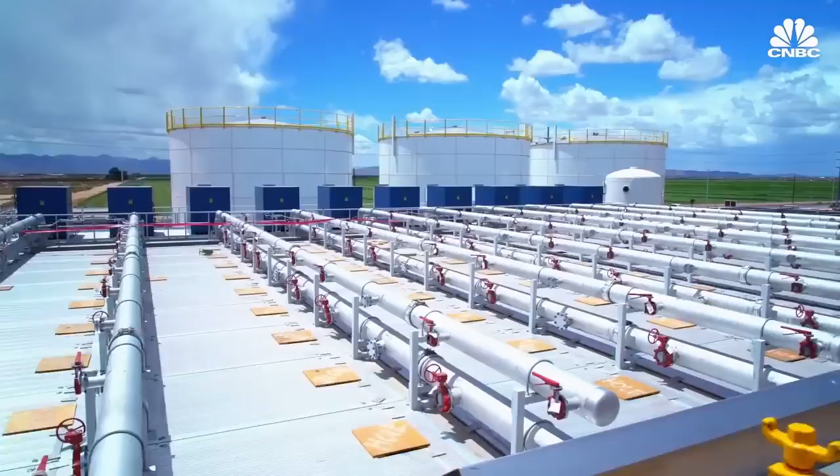And it's spending another $20 billion on 2 new fabs in Arizona, where it will make not only its own chips, but those designed by Amazon, Qualcomm, and others. It also starts building up that base within the United States so that the United States can become more self-sufficient. We asked Intel's top executives and semiconductor analysts about how Intel fell behind and whether its aggressive plans for more U.S. manufacturing could catapult it back to the front of the pack again by 2025.

The story of Intel's founding is also the story of how Silicon Valley got its name. William Shockley, the inventor of the transistor, the most basic building block of computing, moved to Mountain View to start Shockley Semiconductor Labs in 1956.

A year later, the so-called Traitorous Eight quit to start Fairchild Semiconductor, which quickly became the world's premier chip company. A decade later, two of these founding fathers of Silicon Valley, Bob Noyce and Gordon Moore, left to start their own company. They first called it NM Electronics, then quickly switched to the name Intel, for Integrated Electronics.

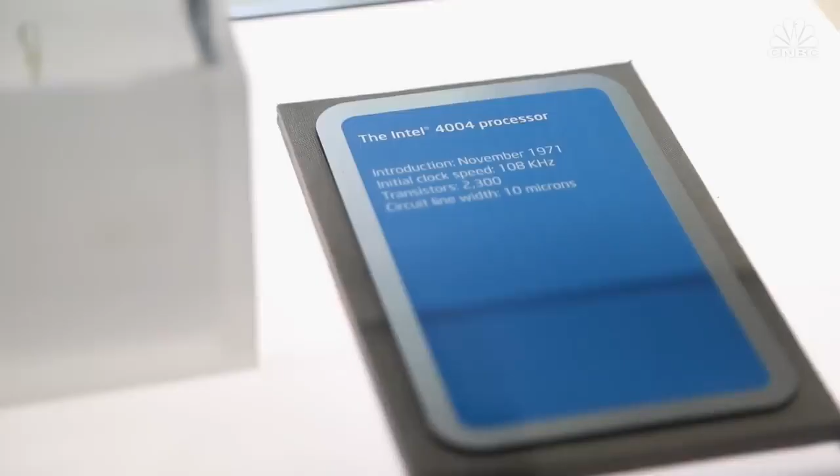At Intel's founding in 1968, short-term memory, or RAM, didn't exist. Neither did microprocessors or CPUs, today's brains of every computer. Those are both Intel innovations. These transistors are doing the most advanced computational capabilities never thought possible, and it also enables the ecosystem all around us.

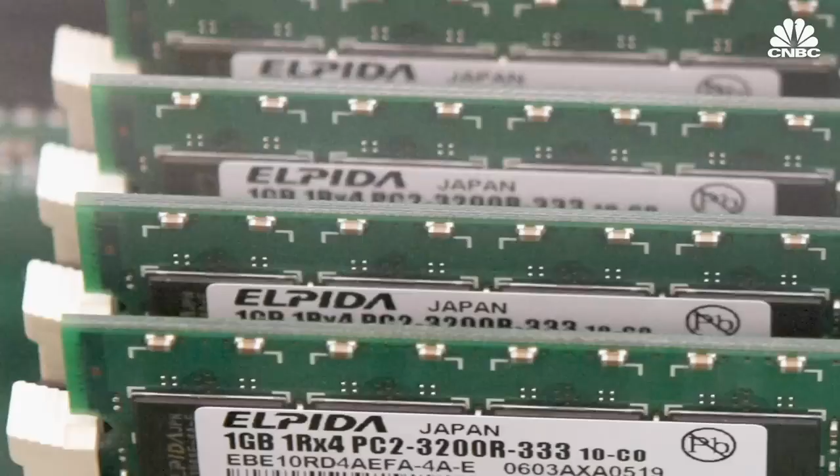A short 3 years after raising an initial funding round of just $2.5 million, Intel went public with a market cap of $58 million. Making chips with memory capabilities was great business, so much so that well-established Japanese electronics companies like Hitachi and Fujitsu wanted in. A dozen years later, their massive factories, which had been operating 30-plus years longer than Intel's, were making memory chips far faster and more affordably than Intel could.

In 1974, Intel's global market share of the memory business was nearly 83%, but by 1984, it was down to just 1.3%. So in 1985, Moore and then President Andy Grove famously fired themselves, walked out the door, then walked back in and made a drastic pivot away from memory chips and toward microprocessors.

This was just 1 year after the first Mac computer came out. They kind of made a decision, it's a huge one, to get out of that business and to bet the company effectively on this new market. Remember, there was no PC industry, no personal computer industry back then.

Last year, Intel announced it's selling most of what remains of its memory business to South Korean rival SK Hynix for $9 billion. In 1971, Intel released the 4004, the world's first central processing unit, or CPU.

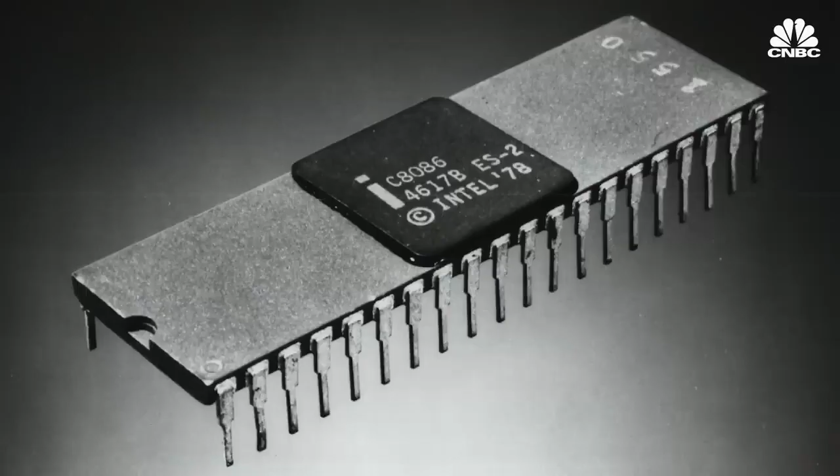For the first time, engineers could purchase these building blocks to use in all kinds of electronic devices. Intel processors were in the world's first personal computer in 1974, and its groundbreaking x86 architecture processors were in the first IBM personal computers by 1981.

It revolutionized transistor density and speed with the first 32-bit processor in 1985. It took competitor AMD 6 years to reverse engineer a similar product. Suddenly, personal computers had to have an Intel processor to be competitive.

Andy Grove took over from Moore as CEO in 1987, and Time magazine named him Man of the Year in 1997. The market for personal computers continued to grow through the first decade of the 2000s, and Intel reigned supreme in making the chips that powered them.

In 2011, global shipments of smartphones started sneaking past PCs. That's about the same time Intel turned down an early offer from Apple to make crucial chips for its first iPhones. That was a massive mistake, because what they actually missed was the start of the entire shift from PC to mobile.

The chip world was also in the midst of another trend. Back when Intel was first shipping out its revolutionary processors, chip companies took great pride in designing and making their own chips. 'Real men have fabs' was a common saying at the time. But as Moore's Law proved true decade after decade, chips got so complex that making them became an enormous undertaking. Building a fab today takes at least 2 years and $10 billion.

So huge companies like Apple, Qualcomm, and Nvidia decided not to build fabs, but rather to outsource the expensive, highly specialized manufacturing process to companies like TSMC, which focuses only on its foundry business, making chips for others. This has allowed TSMC to not only catch up, but in my opinion, surpass Intel to become the world's greatest manufacturing technology on the planet.

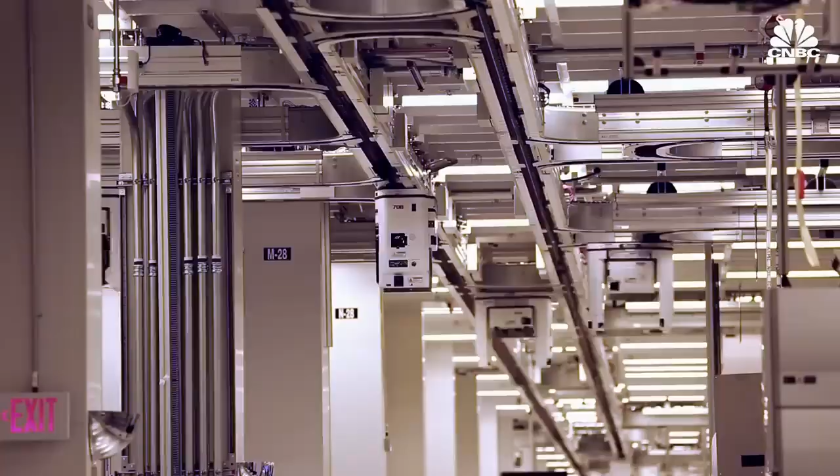Despite the wild success of companies that decided to focus on designing chips, like Apple, or only making chips, like TSMC, Intel still does it all. That makes it an integrated device manufacturer, or IDM.

Keyvan Esfarjani joined Intel in 1996. Now he runs manufacturing and supply chain operations. Advanced equipment capabilities are becoming more expensive. You got to get it right, otherwise it could be very, very costly.

Since Andy Grove retired in 1998, Intel has seen a series of chief executives who have gone back and forth about how much the company should focus on the costly manufacturing end of the chip business. The most recent turnover happened in February when Bob Swan was replaced by Pat Gelsinger, who started at Intel in the 70s at age 18.

30 years at the company. I mean, I joke, I went through puberty, I started at Intel so young. At age 25, Gelsinger led the architecture of the 486 processor, then rose to Chief Technology Officer by 2001. He left in 2009, and after leading VMware as CEO for nearly 9 years, returned to run Intel this year.

We needed a technology leader to help reestablish the technology company, this company that essentially put the silicon in Silicon Valley.

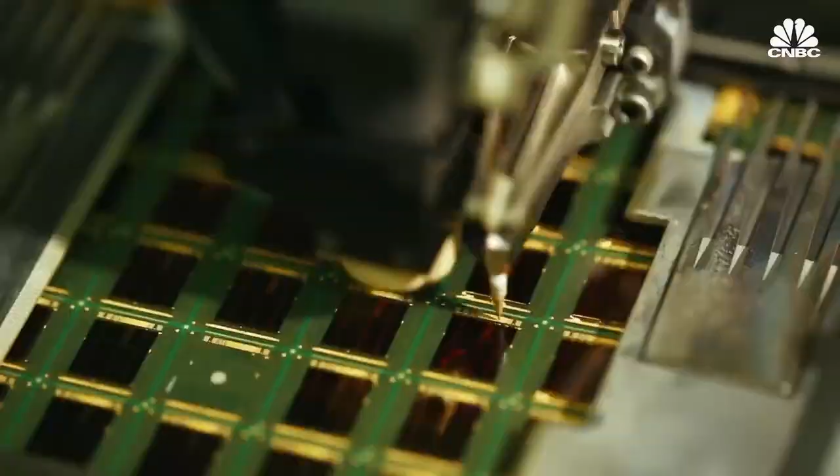Gelsinger's made some major moves since he took the helm, most notably the decision to double down on manufacturing. For decades, the markets have rewarded giants like Apple and Qualcomm for being fabless, but the chip shortage has made manufacturing chips a more attractive business, allowing TSMC, for example, to raise chip prices as much as 20%.

It takes time to build this infrastructure. But the good news is the world is rallying behind building additional capacity. Intel is adding capacity by building a huge new fab at its massive campus outside Portland, Oregon.

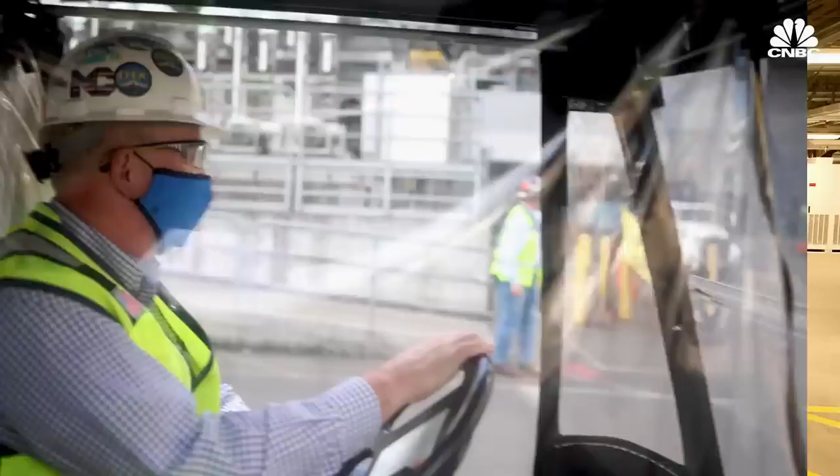D1X Mod 3 is about 250,000 square foot per level of the building. We got an exclusive first look inside the expansion called D1X Mod 3. And what exactly are you manufacturing? We're manufacturing the latest generation of microprocessors for Intel and working to enable Intel's accelerated process for IDM 2.0.

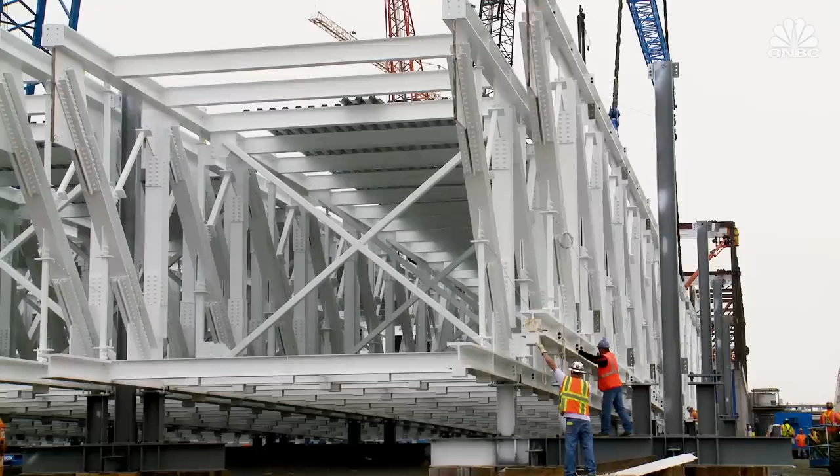At the company's Intel Accelerated event in July, Gelsinger laid out an aggressive IDM 2.0 roadmap for how it plans to ramp capacity and catch up with big leaps in processing technologies. By 2025, Intel says it will surpass the chip-making capabilities of both TSMC and Samsung. We are on a march for yearly innovation, setting a pace for ourselves and the industry to not only get back, but to get ahead again.

Why should anyone trust Intel again? Intel will have to make a bunch of promises, both verbally and financially, in my opinion at least, to get anyone to listen.

Intel has 15 fabs all over the world: China, Israel, Ireland, and the US, in Oregon, Arizona, New Mexico, and Massachusetts. It has assembly and test sites in Vietnam, Malaysia, Costa Rica, and China and the US. It says it makes 8,000 products, outputting 2 billion units a year for some 2,000 customers.

Now Intel is expanding that production specifically in the US and Europe. It's got a major fab expansion underway in Ireland and is reportedly in talks for projects in Italy and Germany. Doubling down on its capacity requirement to support the growing needs of customers around the world is absolutely a significant responsibility of what Intel has got to go drive.

In March, Intel announced it's spending $20 billion to build two huge new fabs in Chandler, Arizona. It broke ground in September this year, with plans to output chips for PCs and data centers by 2024.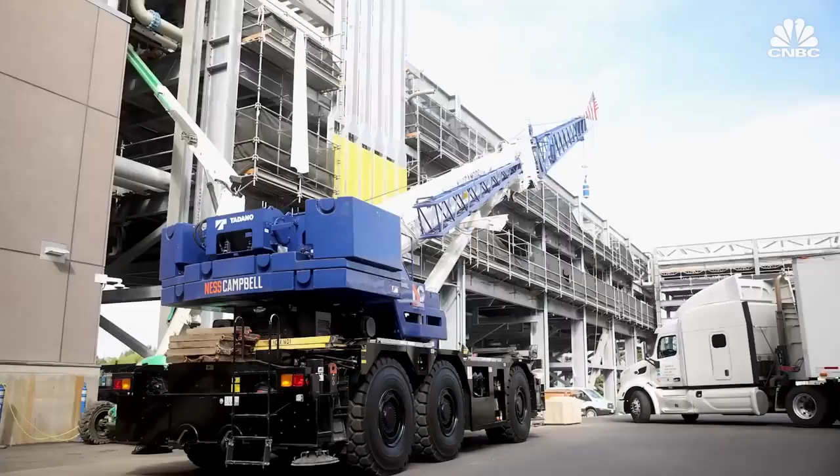It's a very long time to build the concrete, the chemical delivery, the electrical systems. All of this needs to be perfect for a fab to run for something that's creating lines and dimensions that are 10,000 times smaller than your hair.

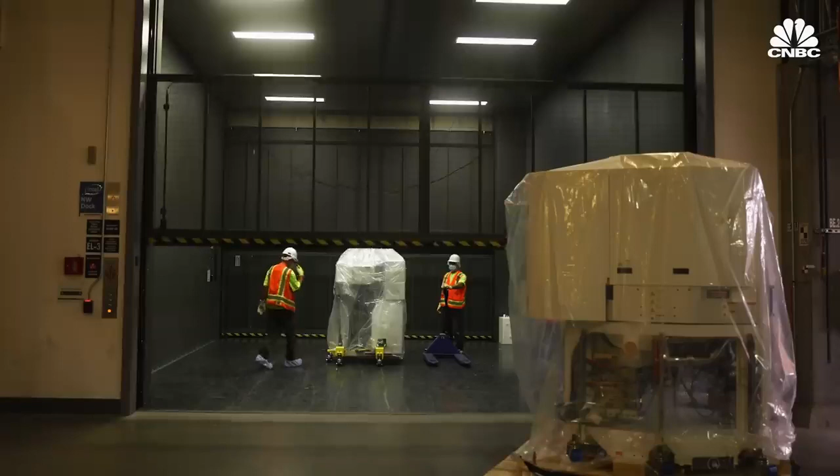When we toured the fab project in Oregon, semi-trucks were dropping off some of the 1,200 massive tools used to make the chips. All of our tools tend to be in the millions of dollars, tens of millions of dollars. They weigh anywhere from 10,000 pounds to 100,000 pounds.

We also got a rare look inside the fab's bustling clean rooms, donning bunny suits that help keep dust and other particles away from the minuscule circuitry on the chips. We're talking about a clean room that is 10,000 times cleaner than a heart surgery room.

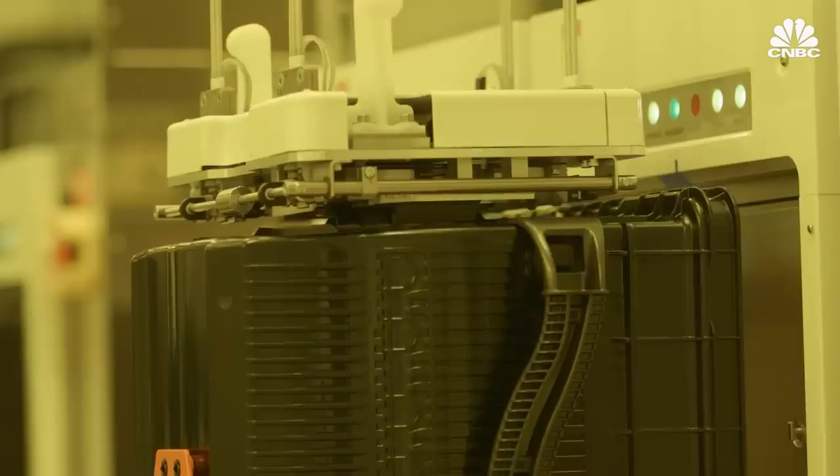It's about the equivalent of about 20 American football fields, which is the amount of clean room space we have here. It's filled with yellow light to prevent exposing the chips to shorter wavelengths of light than the lithography machines use to print designs on the chips.

We have different chemistries and gases that we use to make our chips here at Intel, and we segregate those exhaust streams into these ducts you see here, which are subsequently treated so that we're environmentally responsible in providing clean air coming out of our factories.

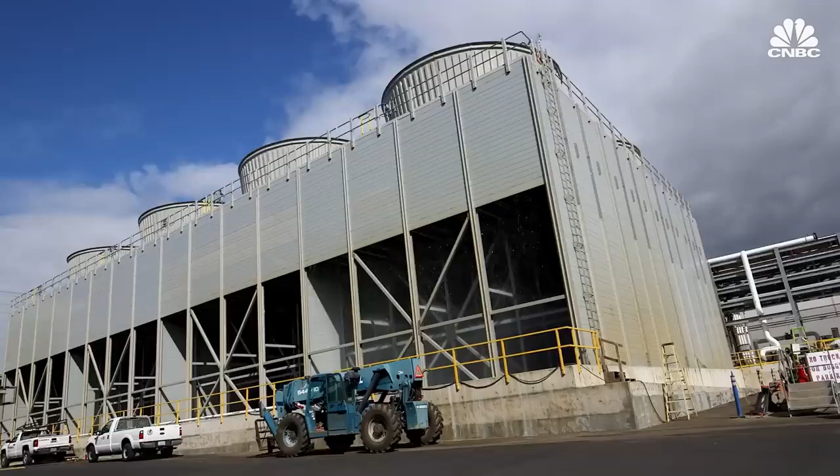Making chips also takes a massive amount of water, not a plentiful resource in the Arizona desert. We're currently out at the Ronler Acres water treatment facility, where today we've reclaimed over 2 billion gallons of water and reused it back into our manufacturing systems and process. We utilize approximately 9 million gallons a day, and we conserve about 95% of that.

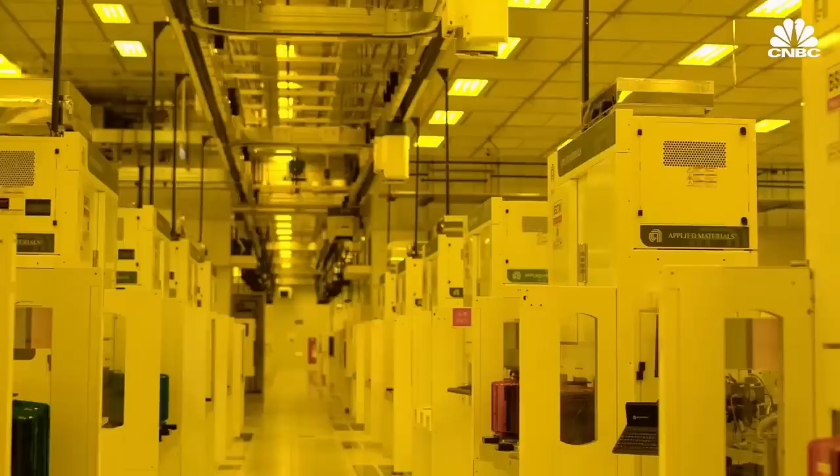The chips being made here are 10 nanometer, used in PCs and data centers. Only TSMC and Samsung can currently make 5 nanometer chips, the most advanced node on the market. In fact, Intel relies on TSMC to make a good number of its chips. We are one of their key customers, and that collaboration continues.

To understand why Intel has chips made by one of its competitors it's trying to catch, let's talk about the different types of chips and the supply chain. Different size chips are found in different types of electronics.

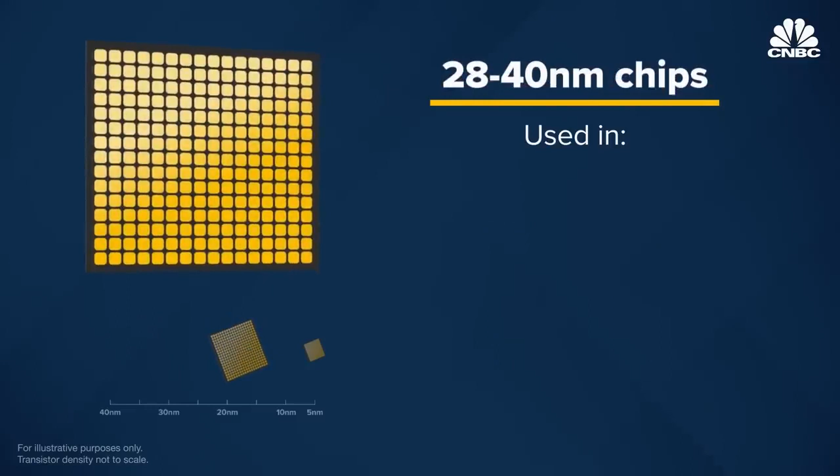Intel makes a lot of 10 and 14 nanometer server chips that function as the brains of computers, CPUs, and powerful chips used in data centers, GPUs. Less advanced 28 to 40 nanometer chips are used most in the auto industry, in components like anti-lock brakes and airbags. Bigger chips are also used in household devices like coffee makers or electric toothbrushes.

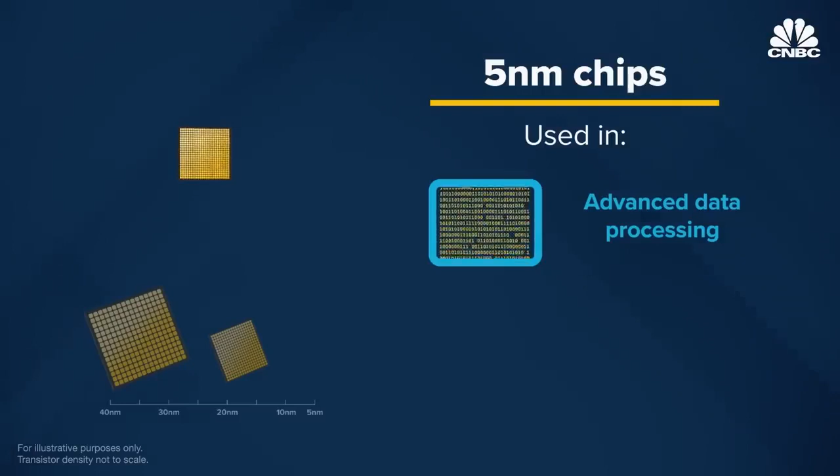5 nanometer chips, the most advanced chips currently made, are highly sought after for data handling and artificial intelligence processing, used in leading-edge technologies like the latest iPhones, NASA rovers, and F-35 fighter jets.

Making 5 nanometer chips requires an extreme ultraviolet lithography machine that uses very small rays of light to etch the tiniest designs onto the chips. Only one company, ASML, makes these EUV machines, and they cost upwards of $180 million.

Costs are going to go through the roof. But if you can't yield the process without it, you have no choice.

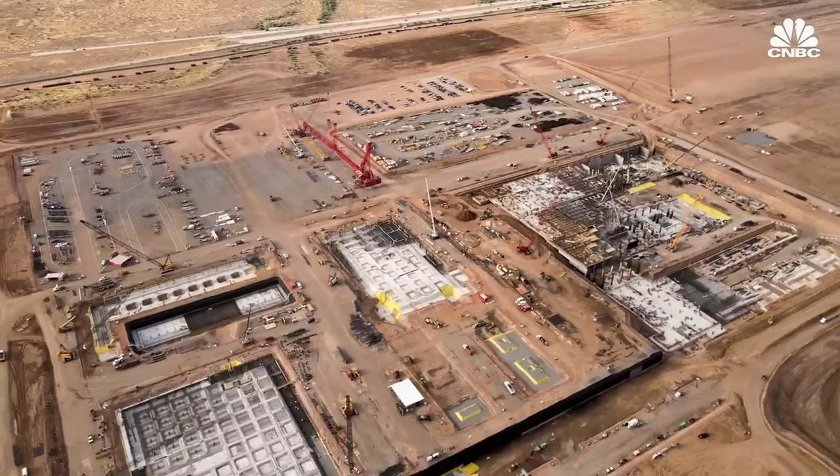Intel didn't buy EUV machines until a couple years after TSMC, which explains why TSMC was able to reach 5 nanometer first. And now, TSMC will be the first to make 5 nanometer chips in the US, building a $12 billion fab just down the road from Intel's new Arizona fabs.

So where does all this leave Intel? It's currently in high volume production of 10 nanometer chips, after years of delays. 10 nanometer was supposed to be here in 2015. We still don't even know the reasons. Their rationale for why 10 failed was that they just tried to do too much.

In July, Intel rebranded to avoid the nanometer-based nomenclature used by other chip giants. Its 7 nanometer chip, which it now calls Intel 4 or Meteor Lake, has been pushed back about a year.

I still don't understand how you could let something slip as much as they have. It's shocking. We had some missteps. The strategy had become a little bit confused on the role that we're going to play in manufacturing for the long term. And now we're leaning back into that with clarity, with clear urgency.

The competition between chip giants and subsequent ramp in production is a positive for the chip shortage, which has impacted all types of chips. Apple is cutting its 2021 production targets for the iPhone 13. Car makers like GM and Toyota have paused production at some plants. When the personal computer market skyrocketed during the pandemic, it drew down supplies of CPUs and GPUs. Intel blamed this component shortage for its PC chip business shrinking 2% in Q3 2021, causing shares to fall more than 10% after earnings were announced in October.

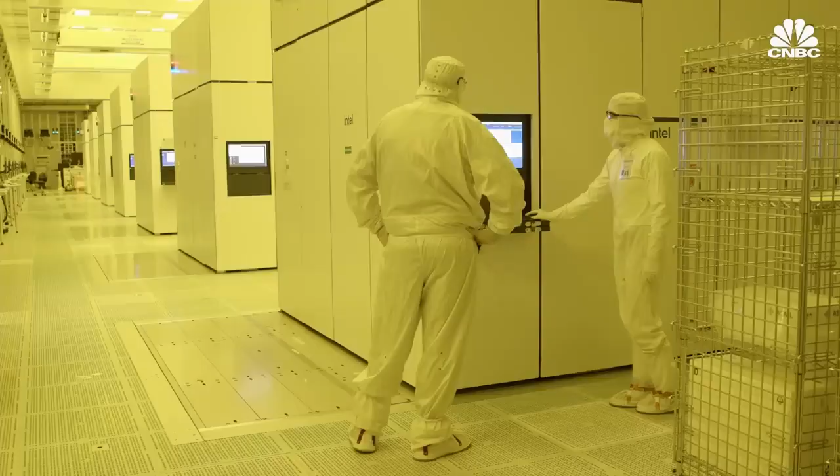Intel stands alone as the only US-based company that designs and manufactures advanced chips at scale. Traditionally, it only manufactures its own designs. But now, in the face of the shortage, it's changing that. We are going to not only make our own wafers, we're also going to use those fabrication facilities to be producing wafers for customers that want us to use their design. It's totally a right-hand turn. We have always had much debate about it.

Intel is calling the new standalone business Intel Foundry Services. We've already had our first revenue with the Amazon packaging deal, our next big customers like Qualcomm and the US government. Foundry has been wildly successful for the other two at the leading edge, Samsung and TSMC, but analysts are not sure it'll work for Intel.

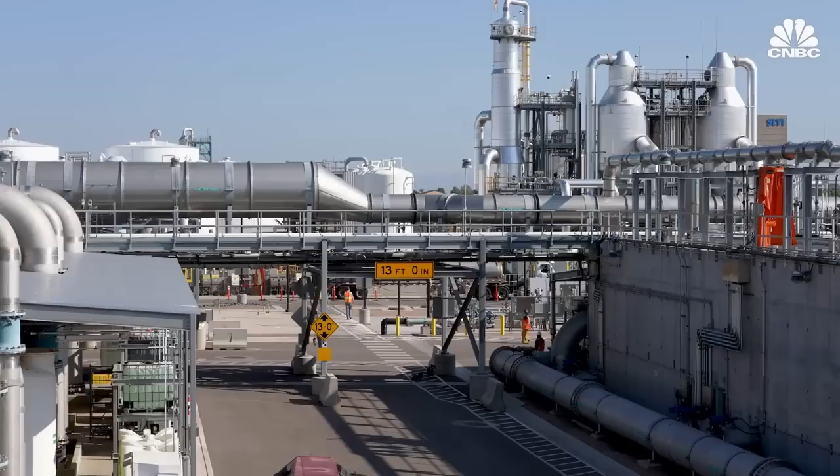Amazon presumably is going to be data center parts. Again, it's not going to be that many units, right? Tiny, right? It's like 5 years away. And if it turns out that Intel is a viable foundry partner, great. But if they're not, it's no skin off their nose. Really, the only benefit I would see to using Intel is if you wanted something to be created onshore in the United States.

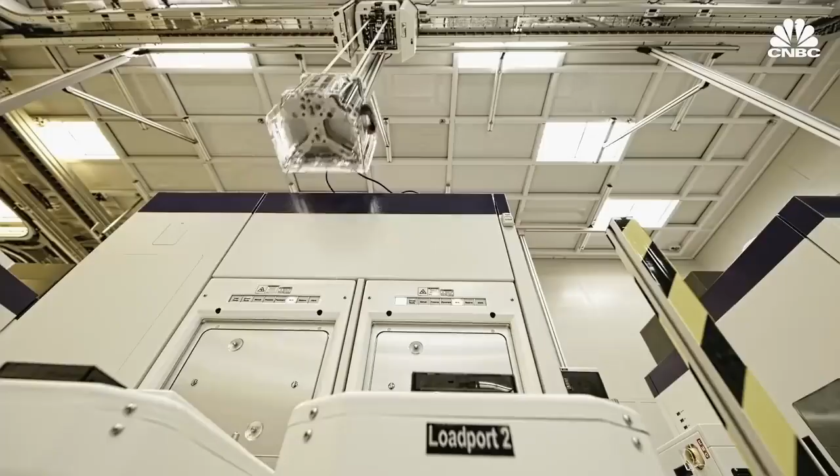And the government is greasing the rails with the CHIPS Act, a proposed $52 billion in subsidies for chip companies committed to making them in the U.S. This is infrastructure. In 1990, 37% of the world's semiconductors were made in the U.S., but last year that was down to just 12%. A moonshot would be that the U.S. is at 30% of manufacturing in a decade or so in the future. And I think the CHIPS Act, as it's structured today, is a great step to start to turn that in a positive direction. As I like to joke, God decided where the oil reserves are, we can decide where the fabs are.

But analysts say much more is needed to help the U.S. bounce back. If the goal of that money is to bring significantly more capacity onshore, it's not anywhere near enough. They need 10 times that amount more.

Because 92% of the world's 5-nanometer chips are currently made in Taiwan, the entire global chip supply is vulnerable to natural disasters common there, like earthquakes and its current drought, and escalating geopolitical tensions between China and Taiwan, and subsequently the U.S.-China trade war. Every aspect of defense, intelligence, and government operations is becoming more digital. And do we want to rely on foreign technology for those critical aspects of our defense and national security? I don't think so. It's critically important for not just the global supply chain, but for the national security, that we must maintain this journey.

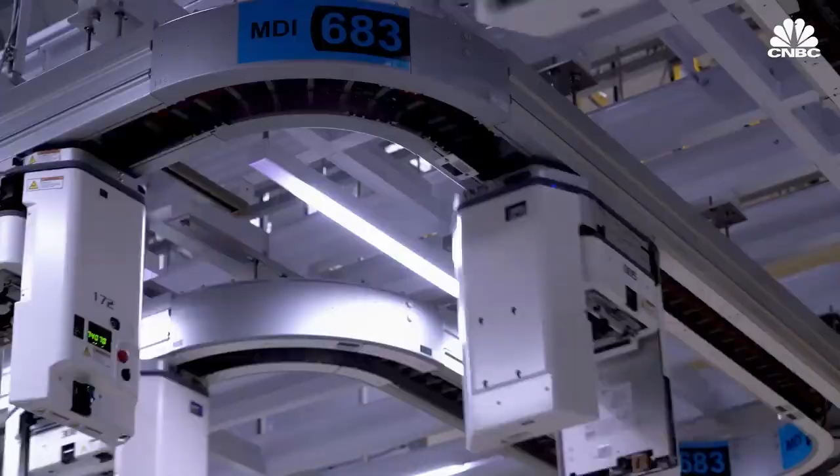However, it is going to require Intel to put its playbook into work. The next steps in this playbook include a chip so efficient, Intel's named it not with nanometers, but with an even smaller unit of measurement, the angstrom. Intel says the 18A, which is in development for 2025, will accelerate it past its competitors. We will be the world's largest integrated design and manufacturer of silicon for the long term.

It is a tall order, and it is not my expectation that he will hit that. But if he could hit that timetable, it would put them back, in my opinion, on par with TSMC head to head.